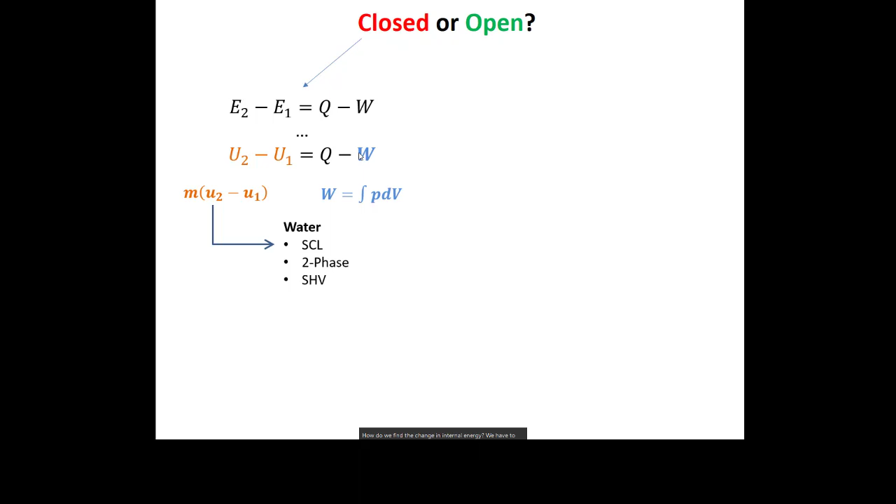Now, a lot of times, the hard part about thermodynamics is this choose your own adventure. So now when we get to how do we fix the state, how do we find the change in internal energy, we have to ask ourselves, well, what kind of fluid is it? Is it subcooled liquid, or is it water, or is it an ideal gas? And even if we know that, we're not done. Because if it's water, we have to know, is it going to be a subcooled liquid or a two-phase mixture or a superheated vapor? So what's the phase? And then if it's an ideal gas, I got to know what assumptions I'm going to make about the specific heat. So am I going to say that it's constant specific heat, where delta U will just be CV times delta T? Or am I going to say it's variable specific heat, and I'm going to try to find that specific internal energy on a table?

Now, eventually, as we progress through the course, we'll also have to figure out what to do on our flow chart here if it's an open system. But we don't have to do that yet. We're going to start thinking about that once we get, well, really to the end of this lecture.

The first half of today's lecture, probably more than half, is going to be going through examples with both water and ideal gases.

Here's the first problem we'll do together today. There's 2 kilograms of pure water in this piston cylinder assembly. The water is initially at 1 atmosphere and 20 degrees Celsius. Heat gets added at constant pressure until the piston hits the stop. So we're adding heat, which makes our fluid expand, which makes me think this water is probably boiling, because as some of it turns to vapor, that vapor takes up more volume, and that's going to happen until the piston hits the stops.

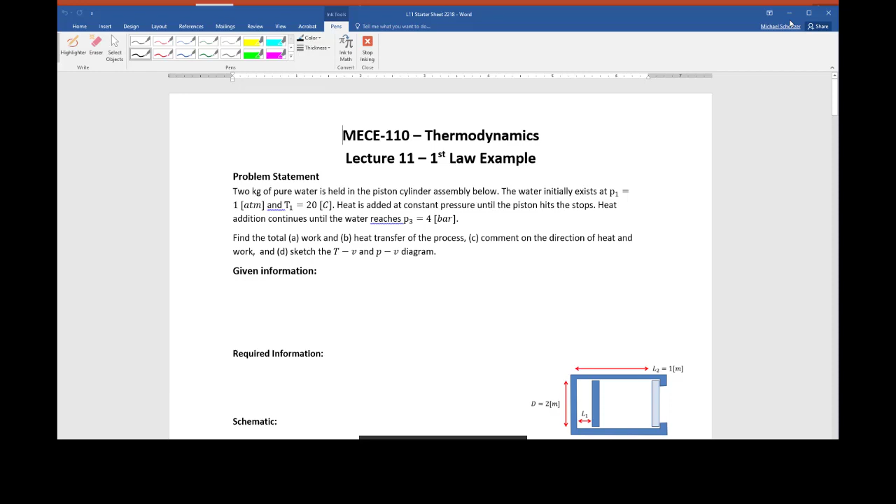I'm going to start working this out on this Word document. This is the same problem. One of the nice things, I don't know if we talked about this too much in class, but I like to draw what I call a state table as we get into problems like this that have more given information.

So in this problem I have 3 states. I have my initial state, state 1, where I'm at this position L1. Then we add heat until we get to our intermediate state, state 2, where we're at the stops, but still at 1 atmosphere. Then we get to state 3, where we're at the same volume. The piston doesn't move, but the pressure changes.

Now at these different states there's some information I want to know, like the pressure, and I like to put units here. This is one of the tips I'll give you: if it's a metric problem like this one, I always try to put my pressures in kilopascals, because it makes my life easier when we talk about work, kilopascals multiplied by change in volume in meters cubed gives kilojoules, which is usually what I want.

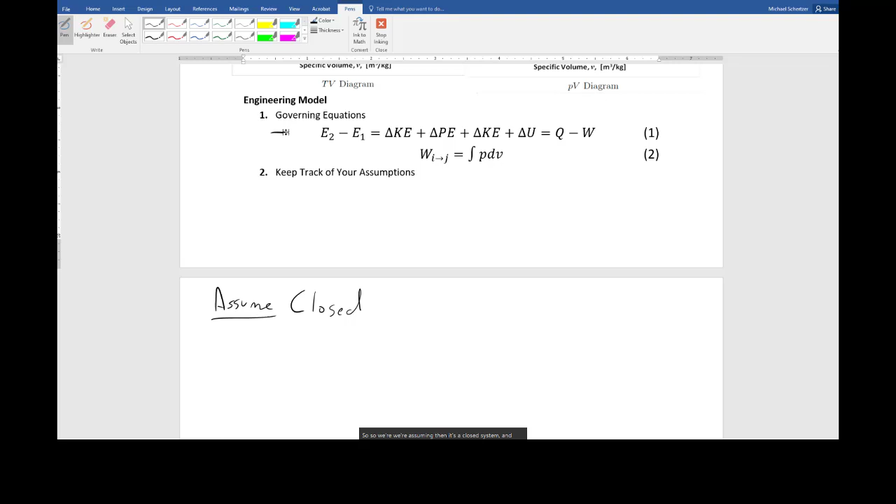So here, our first governing equation is the first law. We're assuming that it's a closed system. And because it's closed, this is my first law. But I'm going to neglect kinetic energy and potential energy, and this should say spring energy as well. All of these I'm going to say are about equal to zero.

And if it's closed, then the mass is constant. So my first law becomes mass times U at the end, minus U at the beginning, is equal to Q minus W.

Now there's two ways that I can think about this problem, and neither way is wrong because it didn't ask me for the specific parts. So I could either say that mass times u2 minus u1 is equal to Q 1 to 2 minus W 1 to 2.

Or I could say that mass times u3 minus u2 is equal to Q 2 to 3 minus W 2 to 3. Or I could sum these up, and if I added these together, I've got positive u2 and negative u2, so I'd get mass times u3 minus u1 is equal to Q1 to 2 plus Q2 to 3 minus W1 to 2 plus W2 to 3. And this right-hand side is equal to Q1 to 3 minus W1 to 3.

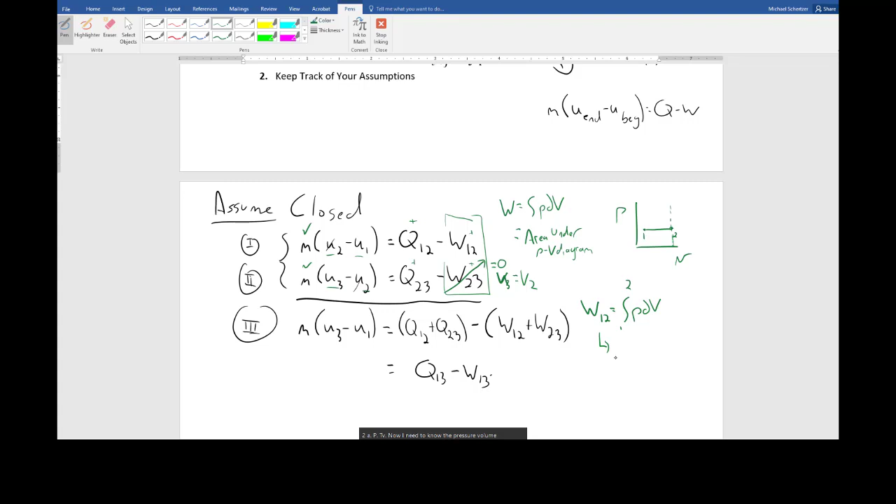Now I need to know the pressure-volume relationship, so oftentimes I'm going to look for something like PV to some constant equals a constant. In this case, they told us that pressure was constant, so N is equal to 0, and this just means that the pressure is equal to a constant, which means I can say that the work from 1 to 2 is equal to some constant, the pressure, which I know, times the integral from state 1 to state 2 of dV.

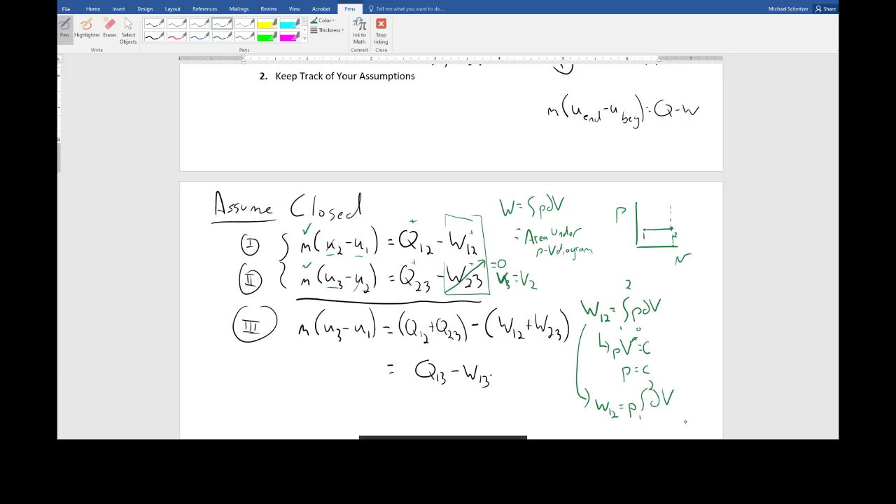And this is my second favorite integral, right? My favorite integral, although maybe this is my favorite integral because even if I wrote this integral for the vertical line, it gets confusing, right? So this is probably my favorite one, right? That pressure times V2 minus V1

is equal to the work from 1 to 2. So my equation 1 here becomes the mass times U2 minus U1 is equal to Q from 1 to 2 minus W from 1 to 2. But that's going to be equal to Q from 1 to 2 minus pressure times V2 minus V1.

My other equation, equation 2, is going to become M times U3 minus U2 is equal to Q2 to 3. That's it, because there is no work, right? Or I guess to be more explicit, I could say minus 0.

So now we got a choice. We can move ahead with this problem trying to figure out V2 and V1 because neither of those is given to us. Or we can try to find these U's. Right? It doesn't really matter. In an exam problem, maybe it says like, oh, find the work, so you do the work first or whatever. But if you were just doing this at your job or something, it doesn't really matter which one you do first. So I'm going to figure out this part first.

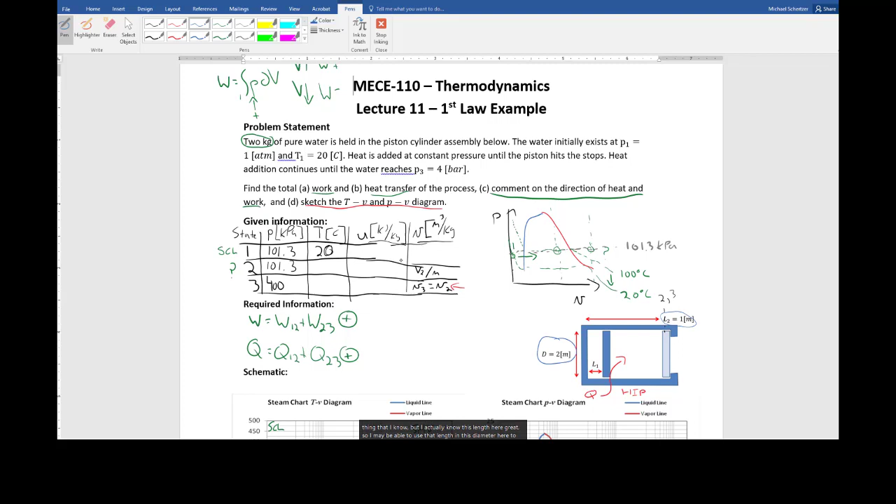But how do I get this one? I can go back up to my state table, and I can see that at state 2, I know the pressure. It sort of looks like that's the only thing I know, but I actually know this length here. So I might be able to use that length and this diameter to tell me something about the volume here. So if I wanted to find the volume at state 2...

The volume at state 2 is going to be the cross-sectional area of my piston, which is pi d squared over 4, or pi r squared, times L2. My diameter is 2 meters, so my radius is 1 meter, and my length is also 1 meter. So this is going to be pi times 1 meter squared times 1 meter, which is approximately 3.14 meters cubed.

But what I really want when I'm trying to fix a state is the specific volume, which is going to be V2 over the mass. I think we said there's 2 kilograms of water in this problem—I should have made it 1, obviously, so I could do the math in my head. So this is 3.14 divided by 2, which is 1.57 meters cubed per kilogram.

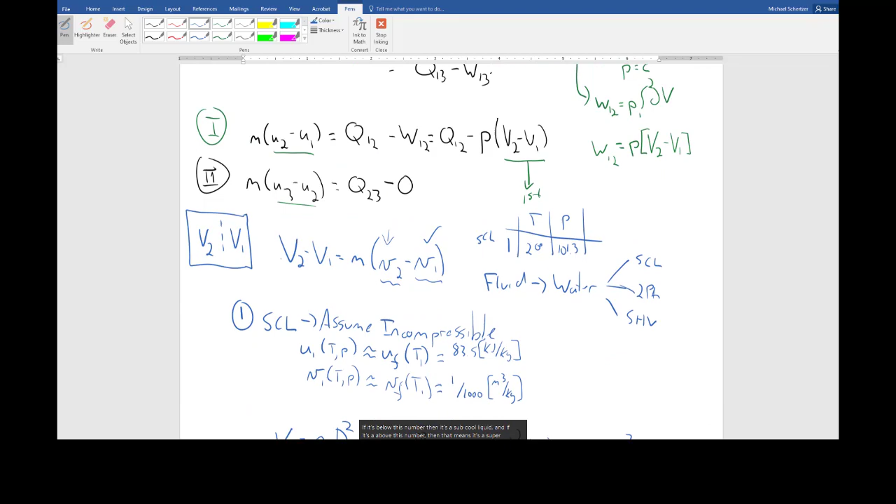Maybe that makes more sense if we look at it up here on our diagram. We're at this 1 atmosphere constant pressure line. If I drew a vertical line down from here, this would be VF, and a vertical line down here would be VG. So if my specific volume is in between these two numbers, then it's two-phase, because I'd be under the vapor dome. But if it's bigger than VG on this line, that would be like this point, and we'd be a superheated vapor. But if it was less than VF, that would be like state 1, and I'd be a subcooled liquid.

So now we have to see. We already looked this one up—this is 1 over 1,000, so that means it's not going to be a subcooled liquid. But if I go back down to that table and look here, VG is 57.79, so that's a pretty big number. But we're at 1.57. So that means we're two-phase. Does that make sense?

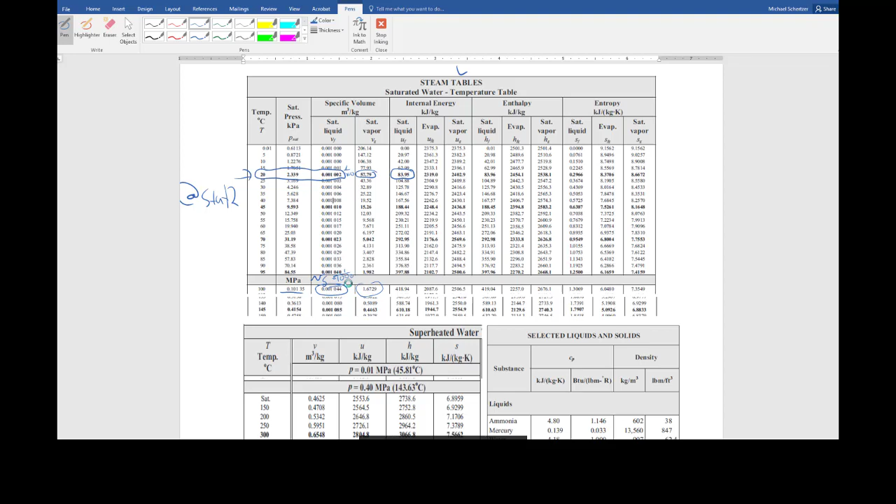So let's redo that math. I'm sorry about that. I looked at the wrong row of the table because I was thinking about the wrong state. So this was, we still conceptually got the right answer, but this number shouldn't have been 57, it should have been 1.67. We're still at 1.57, in between these two numbers, so we still got the phase correct. But our quality is going to be significantly different, because instead of 57 on the denominator, this should be 1.67. So this becomes 1.57 minus 1 divided by 1000, divided by 1.67 minus 1 divided by 1000. And we get 94%, I get 938.

So we do know the quality, but now we want to find UF and UG. And it's important to remember, which is the thing that I just messed up, that here we want to evaluate these properties at state 2. And the thing we know about state 2 is that the pressure is 1 atmosphere, which is equal to 101.3 kilopascals.

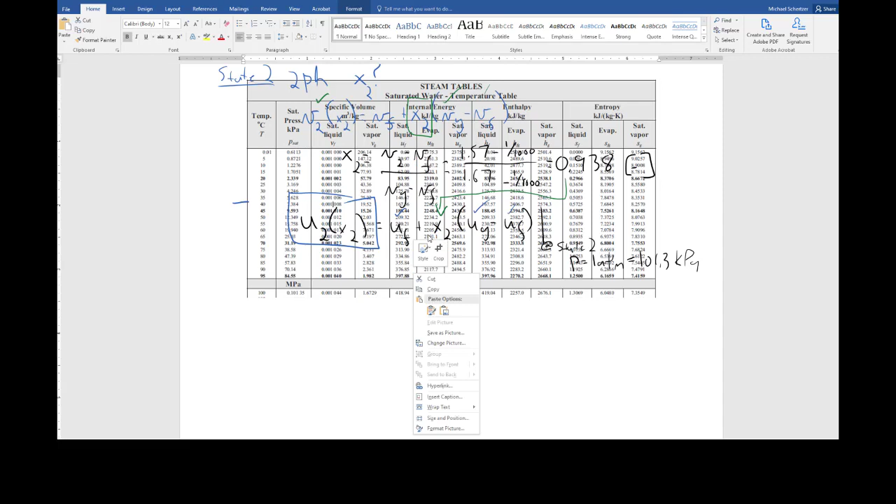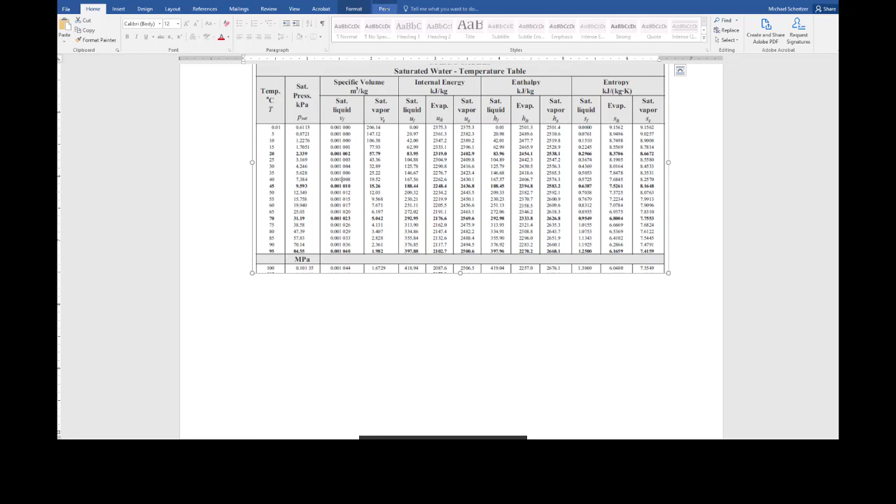So now I'm going to go pull UF and UG off that table. Or can I just do this? So the values that I want are UF, which is 418.94. In UG, I got to be a little careful, this isn't in the textbook, it doesn't have this middle column, but I want UG and not UFG. This is 2506.5. And this X2, what did we say, was 94, 0.938.

So when I put all that into my calculator, I'll do the bracket part first. So I'll keep this 418.94, this is kilojoules per kilogram, plus 2506.5 minus 418.94, times 0.938. 1958.13 kilojoules per kilogram. 2377.1.

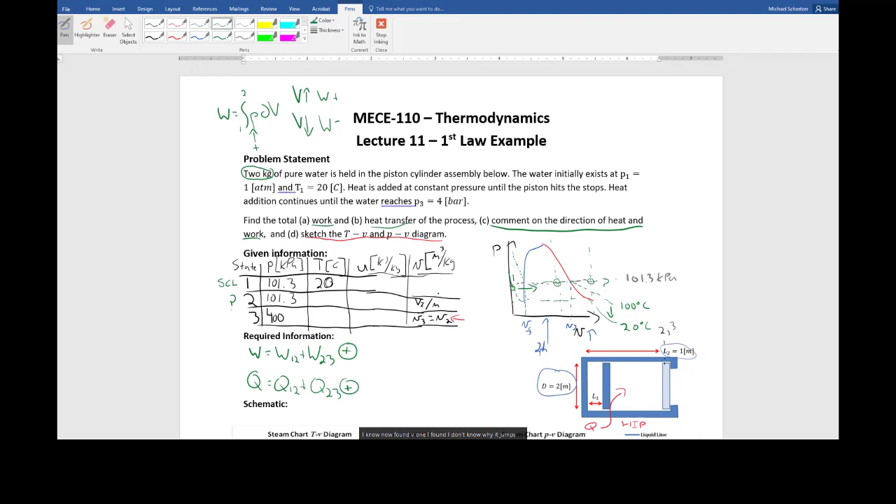So now I know, if I look at my state table... I found V1, oops, I don't know why it jumps like that, I must drag my hand wrong. Where did my state table go? Here we go. I found V1 and V2, and actually, because of that, I know V3 because they're the same. I found U1 and U2. So I'm doing a pretty good job with my states.

I can figure out the work because here, when I know this, the total work, right? I could either do this as... here. So I know that work, I'll do this down here. So I know that work total is equal to the work from 1 to 2 plus the work from 2 to 3. But because the volume didn't change from 2 to 3, I know that that's 0. And because the pressure was constant, we found that this was equal to the pressure at either 1 or 2, it doesn't matter because they're the same. I'll say P1 times, I could write this as V2 minus V1, or I could write this as the mass times P1 is equal to V2 minus V1, little v2 minus little v1.

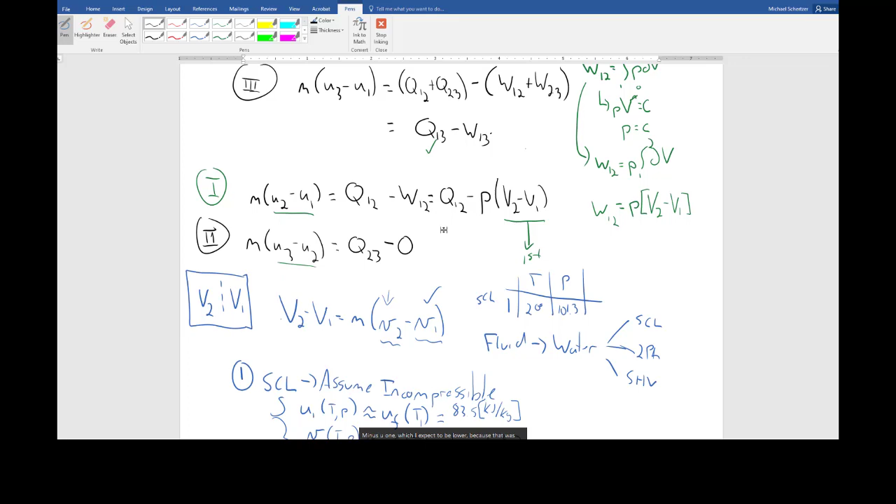It's going to equal my mass, which is 2 kilograms, times my little u at state 2, which was 2377.1, minus U1, which I expect to be lower because that was for a subcooled liquid. I think we have that up here somewhere — U1 was 83.5 kilojoules per kilogram.

Plus my work 1 to 2, which is the same as work total, so that's 317.9 kilojoules. Here I'll keep these two terms separate: 2377.1 minus 83.5, that's in kilojoules per kilogram. I can cancel my units here, times 2, and this is going to be 4587.2 kilojoules per kilogram, plus 317.9 kilojoules.

You can see that even though I canceled these units out, I messed it up over here — this should just be kilojoules, because I took kilojoules per kilogram and multiplied by kilograms. That's good, because — oh, I don't remember what this number was — oh, that's 4587. It's good because I can't add apples to oranges; these have to have the same units to add them together. So this is good, I can do that: plus 317.9.

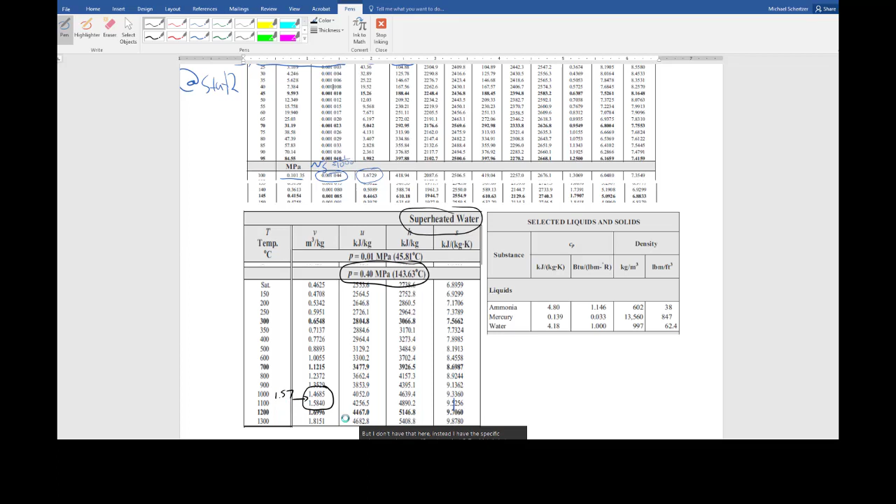My specific volume is 1.57, which is in between these two numbers. So for state 3, my interpolation factor A is going to be my specific volume at 3 minus V min, divided by V max minus V min. So this is 1.57 minus the lower number, 1.47, divided by 1.584 minus 1.47. I expect this to be a pretty high number because I'm a lot closer to 1.58 than I am to 1.47. So 1.57 minus 1.47 divided by 1.584 minus 1.47, and the answer I got was 0.88.

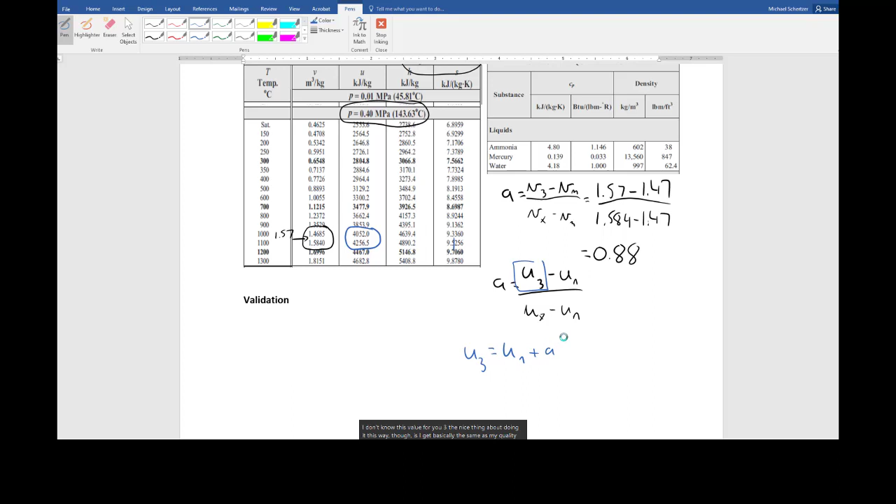But A is also going to be equal to U3 minus U min divided by U max minus U min. So now I've got to look for these specific internal energy numbers. I don't know this value for U3. The nice thing about doing it this way, though, is I get basically the same as my quality equation, that U3 is going to be equal to U min plus my interpolation factor A times U max minus U min.

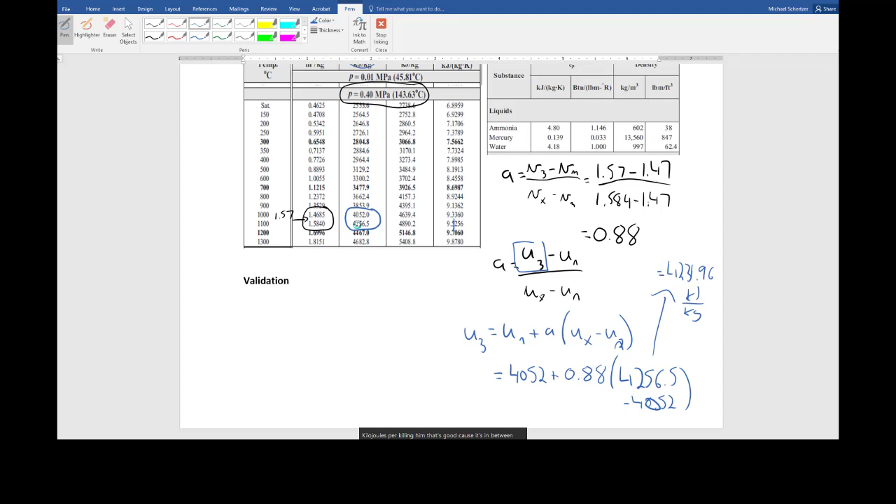Or that it's going to be equal to 4052 - these are all in kilojoules per kilogram - plus 0.88 times 4256.5 minus 4052. And my answer is going to be 4256.5 minus 4052 times 0.88 plus 4052. I get 4231.96 kilojoules per kilogram. That's good because it's in between these two numbers, and it's closer to the higher number, which I think it should be.

So now I can put this finally into this equation over here. This is equal to my mass, which is 2 kilograms, multiplied by U3, which was 4231.96, minus U2, 2377.1 kilojoules per kilogram, is equal to Q2-3 minus 2377.1 times 2. So here I get that Q2-3 is equal to 3709.72. My kilograms cancel, so this is just kilojoules.

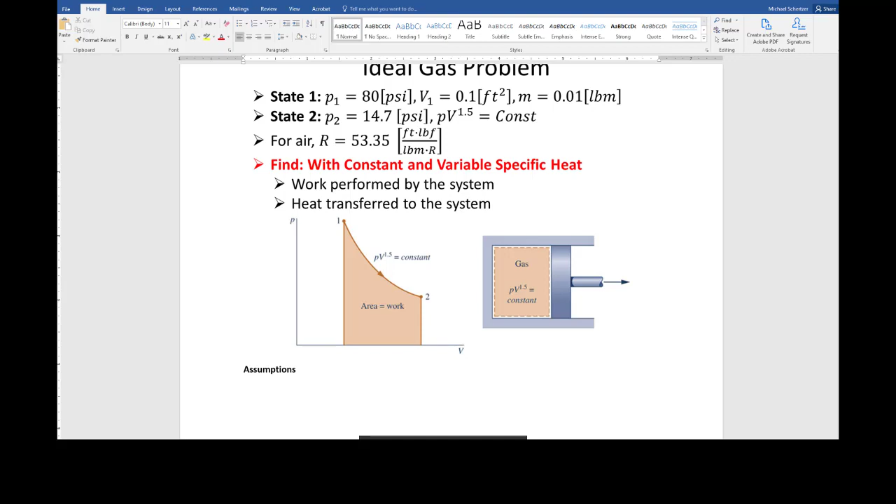We're going to just jump right into the next problem. So this is another first law problem. It's another closed system problem. But here, the difference is going to be when we ask ourselves, what's the fluid? It's going to be an ideal gas instead of water. So it's a little different, right? So we know some information about state 1. We've got pressure, volume, and mass. We know the pressure at state 2, and we know this pressure-volume relationship.

We're also given the specific gas constant for air. We would like to know, as we move between these 2 states, what's the work and what's the heat transfer in the system, right? It says heat transfer to the system, work performed by the system. So one of these things, at least right now, we can tell what the sign's going to be. So in this case, our area is expanding, as we go from state 1 to state 2, the volume is getting bigger. What that means is that the work we expect to be positive. So here I'm expecting work to be positive.

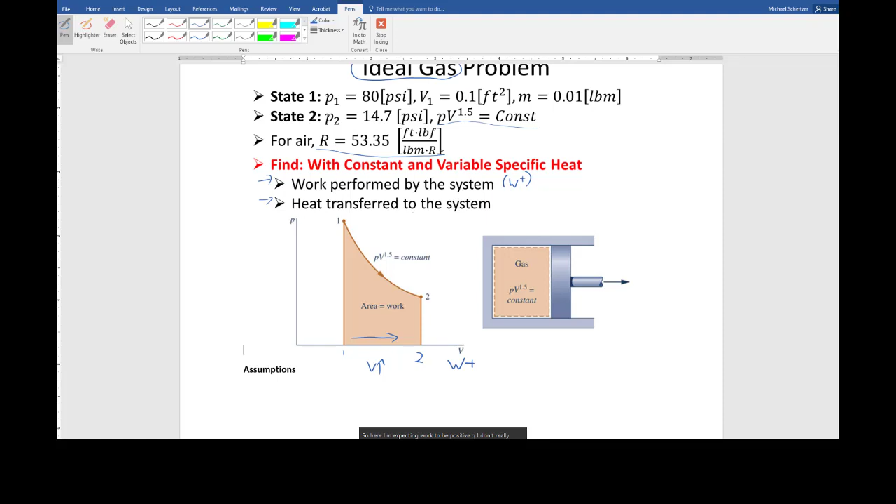Q, I don't really know. But that's why I have the first law. So I'm going to say that my first assumption, assumption 1, is going to be that this is a closed system. And because it's a closed system, that means E2 - well, I'm just going to write the whole thing.

So that means we're going to say that the change in kinetic energy plus the change in potential energy plus the change in any spring energy in the problem plus U2 minus U1 is equal to Q minus W. I'm going to assume that the kinetic, potential, and spring energies are all negligible. That doesn't necessarily mean that they're zero. What it means is that the changes in these things we're assuming are much smaller than the change in the internal energy, so I can neglect these things. They might as well be zero. It's like a speck of sand to a beach. And then this means that the mass times little u2 minus little u1 is going to be equal to Q minus W.

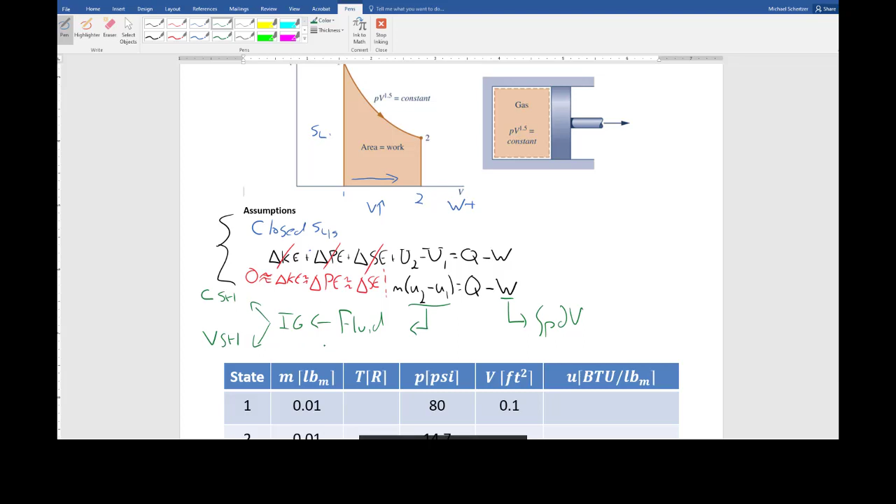I'm going to do this part second. I'm going to try to do it both ways, so you can see how to do it both ways. But first, here, this is my equation 1. First, I want to find the work. So I know that work from 1 to 2 is equal to the integral from state 1 to state 2 of P dV.

But I was told that pressure times volume to the 1.5 is constant. Yes, PV to the 1.5 was constant. That means that P as a function of V is equal to constant over V to the 1.5, or as I prefer to write this, C times V to the negative 1.5.

This is pretty similar to an example we did in class, but that was last week, and I know we're sort of drinking from the fire hose. So instead of just going right to the answer, you might already have some idea what the shape of this answer is going to look like, but it's okay if you don't, because the process of getting the answer is always going to be the same. So if you don't remember, you can just do the math.

So this is going to be the integral from 1 to 2 of this constant times volume to the negative 1.5 dV. But I can take the constant out: integral from 1 to 2, V to the negative 1.5, dV. This is a case where you actually have to do some calculus, which for me, again, is always a little nervous.

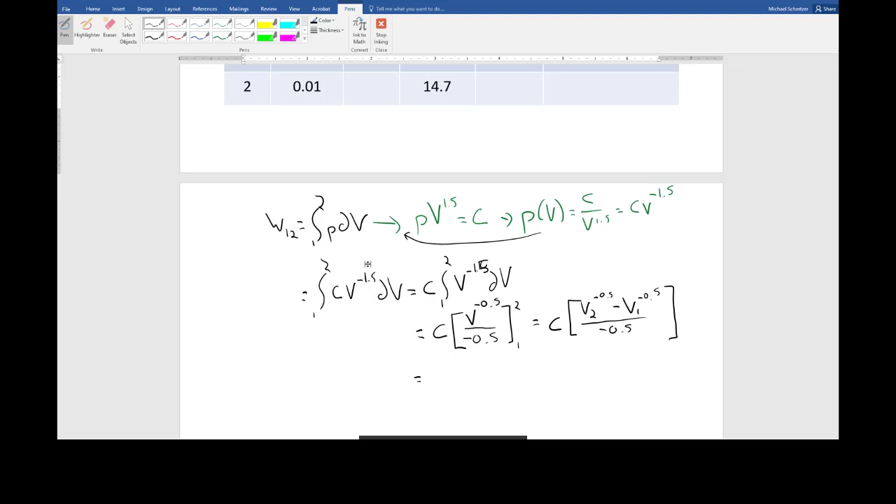I prefer not to have the negative sign in the denominator because I'm weird. So I'm going to multiply the numerator and the denominator by negative 1. Negative 1 over negative 1 is 1, so I'm allowed to do that. This is going to be C times V1 to the negative 0.5 minus V2 to the negative 0.5, divided by 0.5.

But now I remember that this constant is true at state 1 and state 2. If P V to the 1.5 is true everywhere on this line, that means it's true at state 1 and it's true at state 2. So this constant could be P1 V1 to the 1.5, but it could also be P2 V2 to the 1.5. So when I multiply this by state 1, I'll call it P1 V1 to the 1.5, and when I multiply it by state 2, I'll call it P2 V2 to the 1.5.

And I won't skip the step. So this is going to be P1 V1 to the 1.5 times V1 to the negative 0.5, minus P2 V2 to the 1.5 times V2 to the negative 0.5. I did switch V2 and V1 around when I went from here to here because I multiplied by negative, but I could have left it as V2 minus V1 if I left the denominator as negative 0.5.

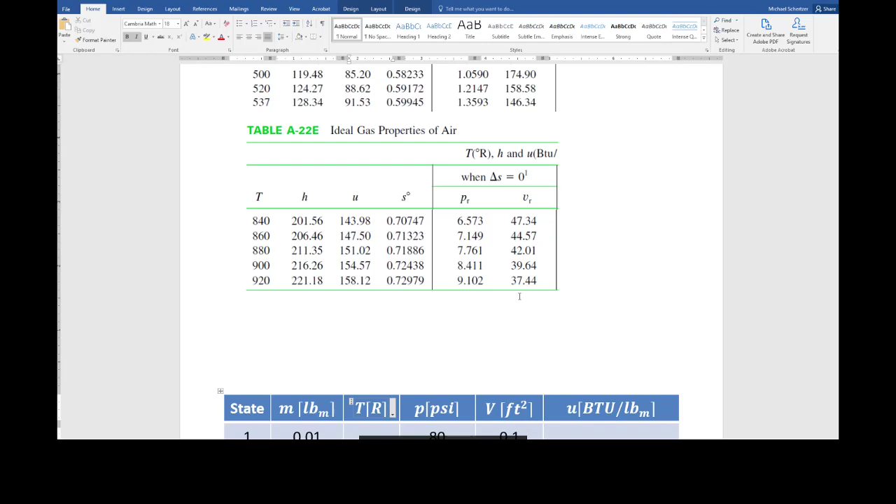Let me... I don't know, did it paste it somewhere and I just didn't see it? Here we go.

Well, anyway, I know that my P1 is 80 psi and my V1 is 0.1 feet squared, right? And the beauty of this method so far is that this is an imperial problem, which I tend not to like as much. And now for some reason my pen doesn't work.

Oh, here we go. But the symbolic part, it doesn't matter until we start putting numbers in, right? So here I know that P1, well, if I write out my state table, right? So I have my states 1 and 2. P1, V1, T1, or P, V, and T. Right, so pressure is in PSI, volume is in cubic feet, and temperature should be in Rankine. We'll see what they gave it to us as.

So for state 1, 80 psi and 0.1, this should be cubic feet. State 2, they only told us the pressure, 14.7, which is atmospheric pressure.

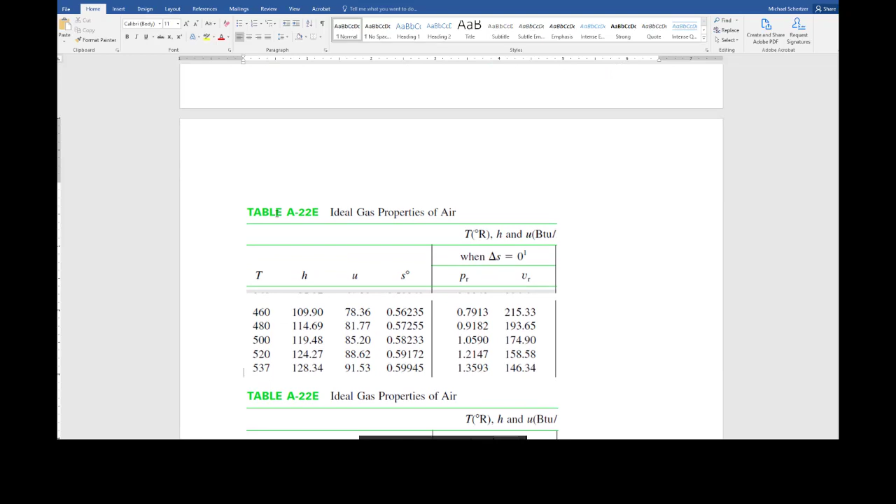So now comes the point where we got to deal with the left-hand side of our equation, because remember we were saying that mass times U2 minus U1 is equal to Q minus W. The good news is now we know the work. I think they told us the mass, but I don't know U2 or U1.

Instead of doing it both ways, since we're going to do two ideal gas problems, let me pick one here. So now I got to ask what's the fluid. Here it's an ideal gas, air. So it has to be variable specific heat or constant specific heat. We're going to do two different problems in two different ways. On an exam, I will tell you which method I want you to use.

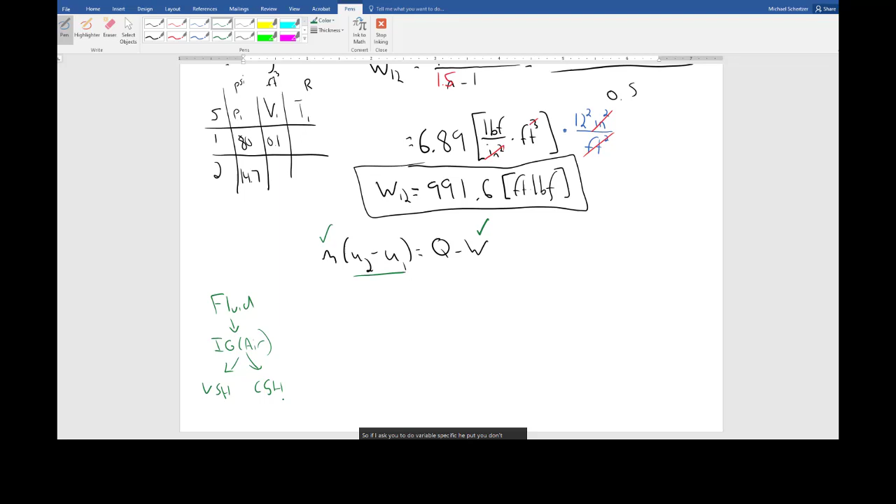It's always best to pick the method I ask you to use, but the next best thing is to use the other method. The worst thing to do is leave it blank. So if I ask you to do variable specific heat, but you don't remember how, then do constant specific heat, because that's a lot better than doing nothing. Here we're going to do constant specific heat.

Under the assumption of constant specific heat, we're never going to find the individual specific internal energies. Instead, we're going to take mass times CV. Actually, you know what, since they don't tell us what CV is, I'm going to change my mind. I'm going to do this one as variable specific heat and the other one as constant specific heat.

So here we're going to do variable specific heat, not constant. This is the more accurate answer. The downside is we got to use the tables. So here we need to find U2, which is a function of T2, using table A22E, and we also have to find U1, which is a function of T1, on table A22E.

The downside of this is that I don't know T1 or T2. When you get into a situation with ideal gases and you can't find one of pressure, volume, or temperature, or mass, that's a good bet you're going to have to use the ideal gas law. So here we'll use the ideal gas law, which is pressure times volume equals mass times R times T.

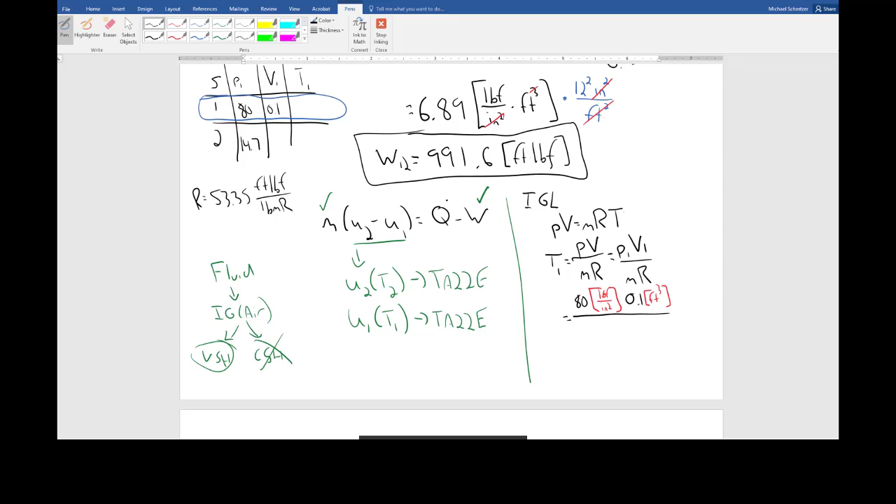Is it 0.01? I can't remember. 0.01 pounds mass, times R, which we transpose down here as 53.35 foot-pounds force per pound mass. Now the good news here is that the pounds mass cancel, but we don't have foot-pounds on the top, right? We've got cubic feet times pound force over inches squared.

So again, we're going to have to get rid of that inches squared, as 12 squared inches squared per foot squared. The inches squared are going to cancel, that's going to cancel, and now we have foot-pounds. Foot-pounds canceled with foot-pounds, and we're going to get, oops, there should be a pounds mass degrees Rankine over here. And then our denominator is going to be 1 over Rankine, which is Rankine.

So here, if I put all of this into my calculator, I'm going to get 80 times 0.1 divided by 0.01, that's 800, divided by 53.35, so that's 14.995, 1 over 1. Oh no, because I forgot to multiply by the conversion.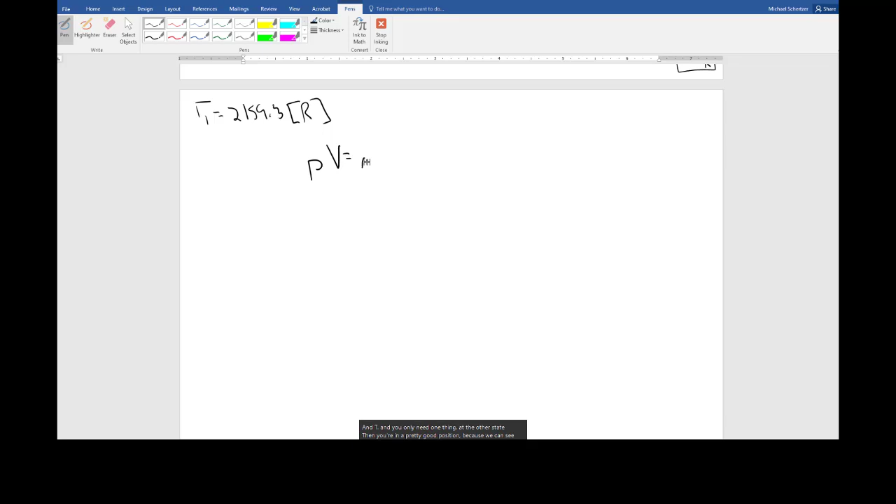We know that PV is equal to... I don't know why it does that, sorry, I'm lost on the page here. PV is equal to M R T.

But because this is a closed system with no chemical reactions, the mass stays constant because it's closed, and this specific gas constant stays the same as long as it's the same gas. So if there's no chemical reactions, it's the same gas, and what that means is that PV over T is equal to MR, and that's true at state 1. It's also true at state 2.

So I don't care about M and R anymore because they're constant. Right now, what I'd like to find from this equation is T2. So when we look at this, I know P1, V1, T1, P2, and V2, but I don't know T2.

So if I'm trying to find T2, that's going to be equal to T1, and then I'm going to get a couple of different ratios, right? So T1 times P2 over P1 times V2 over V1. And there's some beauty in this because these pressures are both in PSI, but it's a ratio of pressures in PSI.

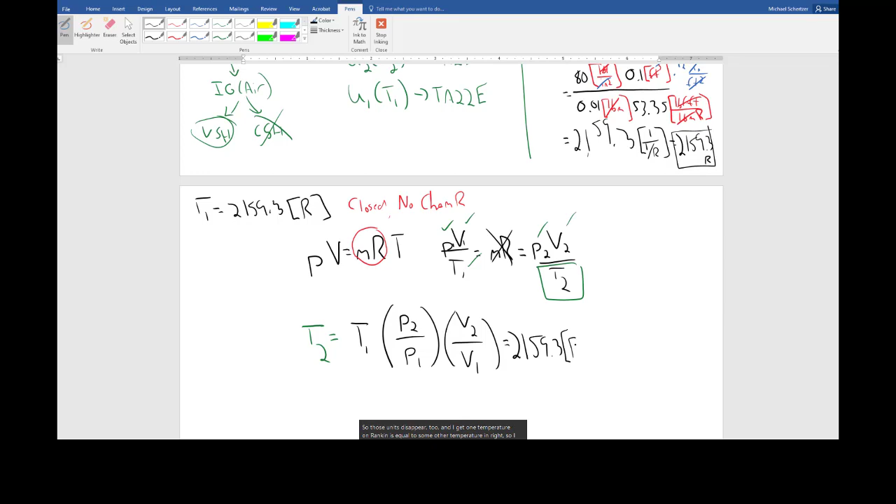So this pressure over pressure has no units, and these volumes are in cubic feet, but it's cubic feet over cubic feet, so those units disappear too, and I get one temperature in Rankine equal to some other temperature in Rankine. So I can take T1, which I know is 2159.3 Rankine, times V2 when I calculated it up here was 0.31 feet, so 0.31... oh, I guess I do the pressures first. 0.31 over 0.1, those are cubic feet, but they go away.

And these pressures are in PSI. P2 is 14.7 and P1 is 80. So I'm going to get 2159.3 times this 14.7 divided by 80. This is 0.18, and this is about 3.1. So then this is times 0.18 times 2159.3.

This is going to be 1204.9 Rankine. This is T2, and T1 was equal to 2159.3. And this is great because I know that these specific volumes or the specific internal energies are a function of the temperatures. But I'm not done yet, because I need to actually find those values on the table.

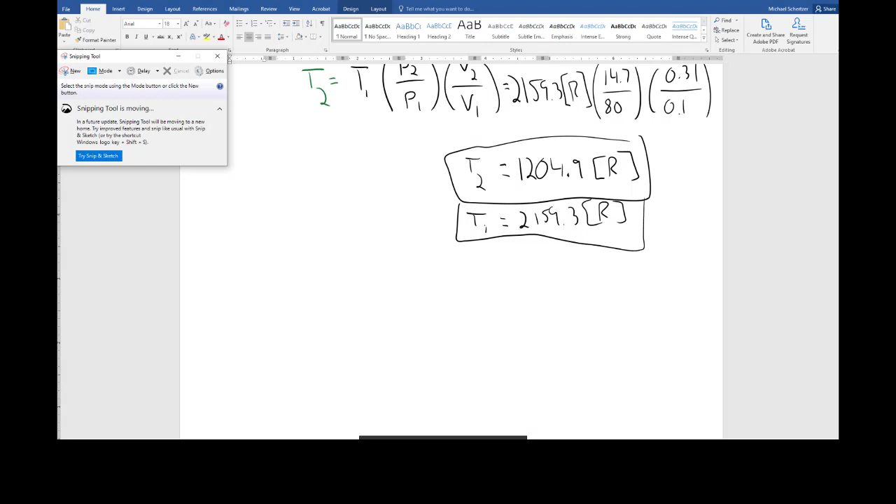Here, why don't I do this... and they're not on this table. Oh, that's unfortunate. But if they were on the table, then what I would do is I would find the values in between. So here I would go to, let's pull up.

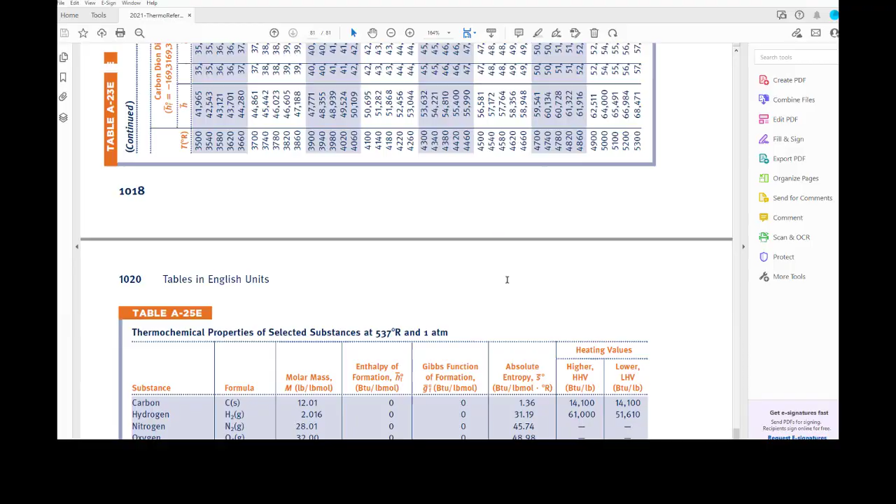What would we say, 2159 or something? And what are the values? 2159 and 1204. 2150, oh, it's in between that. Okay, so I'm going to snip this.

So some of this stuff, we don't know what it is yet on this table, but we know this is temperature in Rankine. This is... no, this is H in kilojoules per kilogram, and this is U in kilojoules per kilogram. The rest of this stuff, we don't know what it is yet.

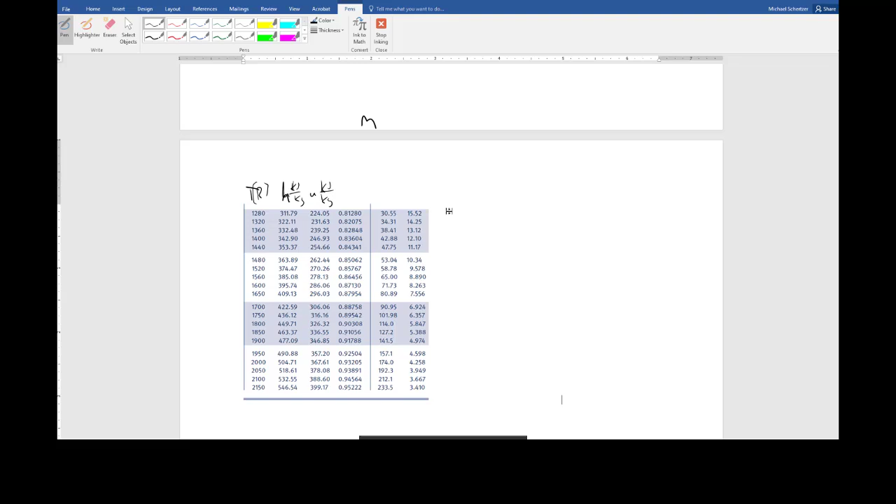So my two temperatures are 1204.9, which is 1205, and 2159. 1205 and 2159. So I didn't go, sorry. So 2159 is just above here. Let me go back and get a better snip here.

So here, 1205 is in between 1,200 and 1,240, so I need to find my interpolation factor. A is going to be 1205 minus 1,200, divided by 1,240 minus 1,200. 1205 minus 1,200 divided by 40. That's 0.125.

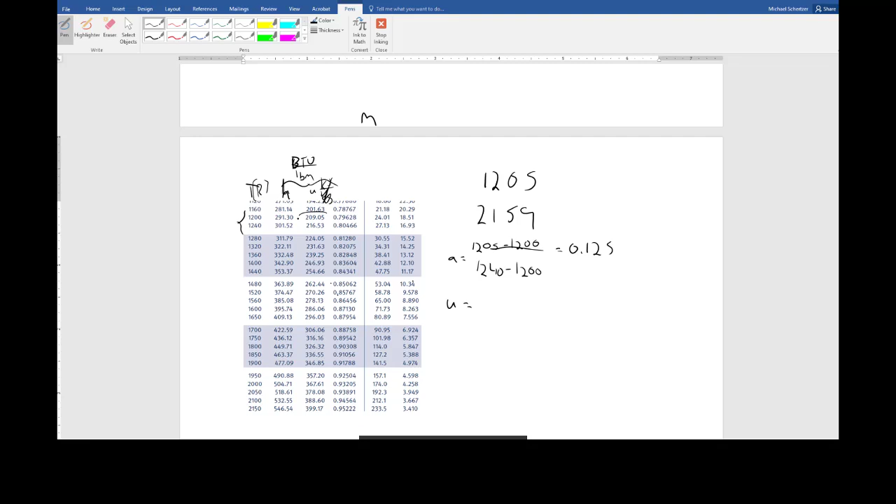209.05, no, it's going to be the value that I want. U1 minus U-min, which is 209.05, divided by the maximum value, 216.53 minus 209.05. But I want to rearrange this, because I don't know U1 and I do know A. So U1 is equal to U-min, which is 209.05, plus 0.125 times 216.53 minus 209.05.

And I'm going to get 210.0, correctly BTU per pound mass. So that gives me U1, which is good because now when I go back to my first law, I know U1. The only thing here I don't know is U2.

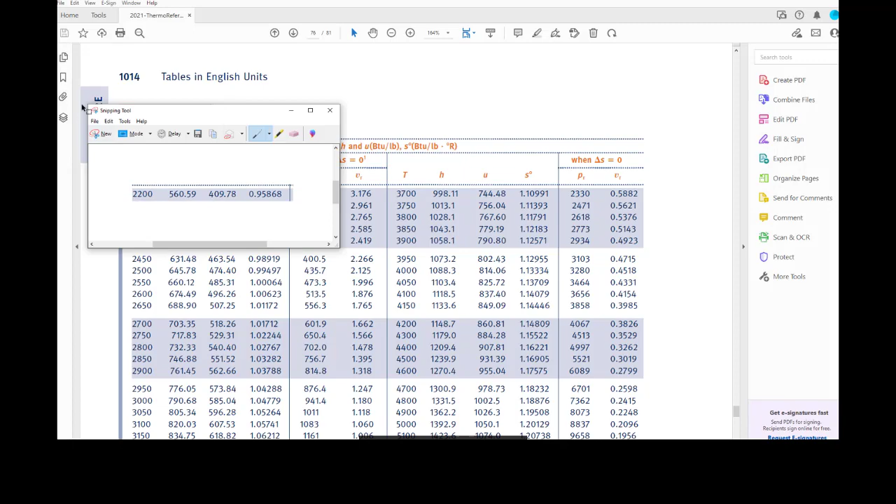Unfortunately, that means I've got to interpolate onto the next row of the table. So if I come down over here and snip just this guy... sometimes I'm just going to leave it like this, maybe. We'll see. Yep. So now this is my U value here, and this is my other U value.

So here in this 50 degree range, it goes up about 10. So we have my interpolation factor B similarly: we know the temperature, our other temperature is 1205... no, this one is the 2159 minus 2150, divided by the full range, 2200 minus 2150. And this is going to be 9 divided by 50.

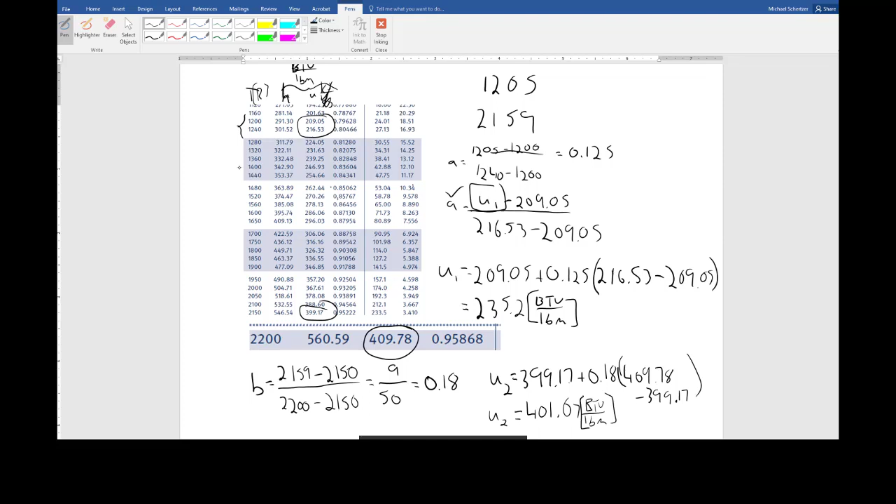So now I have U1 and U2. So my equation, which was mass times U2 minus U1 equals Q minus W, or Q, which is now the thing I'm looking for, is equal to M times U2 minus U1 plus W. I know all of these things. The mass, I believe, was 0.01 pound mass, I think.

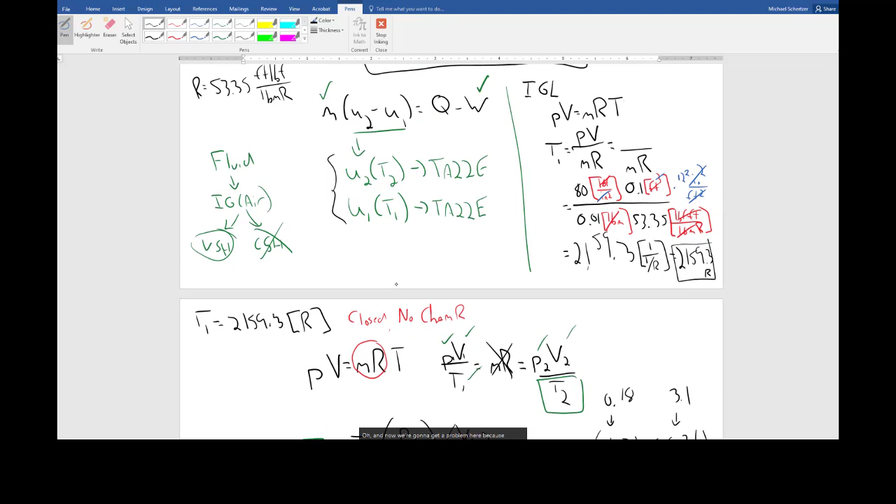.01 pound mass times U2, which is 401.07 minus 235.2. This is in BTU per pound mass, which is nice because those two things cancel. Oh, and now we're going to get a problem here, because when I calculated the work, I did it in foot-pounds. It's 991.6 foot-pounds.

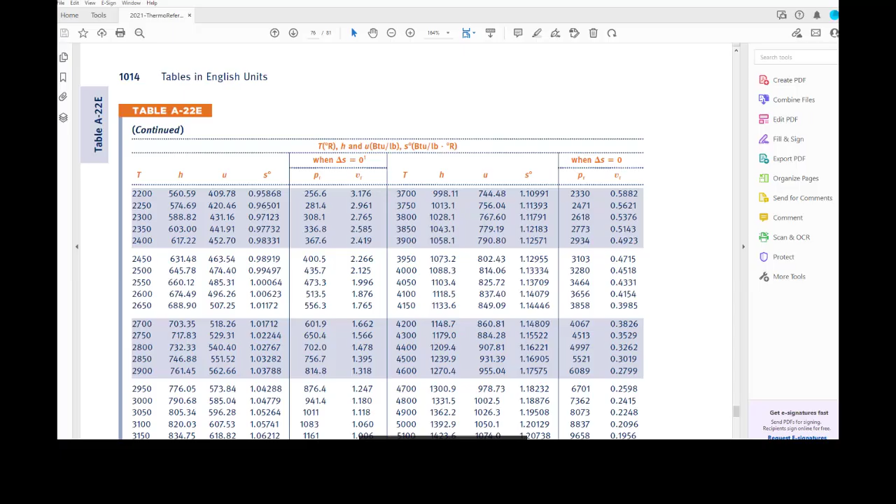Now this is a thing that you're probably going to eventually get burned into your head, even if you don't want to. But let's see if we can find it. Is it here? If not, it's on the equation sheet. Energy. So 1 BTU is equal to about 778 foot-pounds. That's in this reference table, on the website on the very first page, or the equation sheet I put together for the class. So here I know that 1 BTU is equal to 778 foot-pounds force.

So when we add these together, it might look like one's really small and one's really big, but we don't really know anything until we get everything into the same units. So 401.07 minus 235.2 times 0.01, this is 1.66 BTU, plus 991.6 foot-pounds force times 1 BTU per 778 foot-pounds force. So those cancel, and now this number that looked really big is actually not that big - or at least it's of the same magnitude as this number.

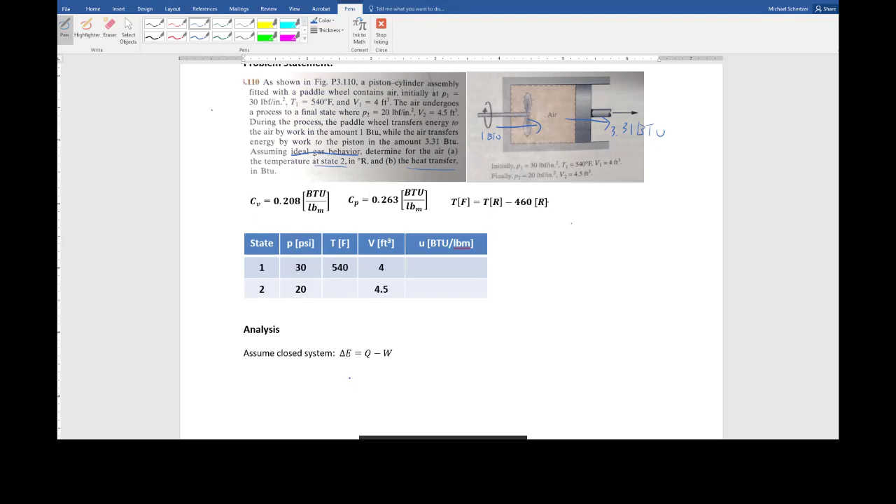So here we're going to assume - first it tells us it's an ideal gas, so we can assume that it's an ideal gas in a closed system. This means that we get delta E equals Q minus W, but here I'm going to assume that the change in kinetic energy is approximately equal to the change in potential energy, which is approximately equal to the change in spring energy, approximately equal to 0.

So my first law, unsurprisingly, becomes M times U2 minus U1 equals Q minus W. We're trying to solve for, I'm going to say W net here. We're trying to solve for Q. Q is equal to M times U2 minus U1 plus W net.

Usually what I would tell you, what we've been saying this whole time, is work is equal to the integral of P dV. But in this case we cannot use this relationship because we don't have a pressure-volume relationship. Instead, they just told us - so this is going to be the work from the paddle wheel plus the work from the system.

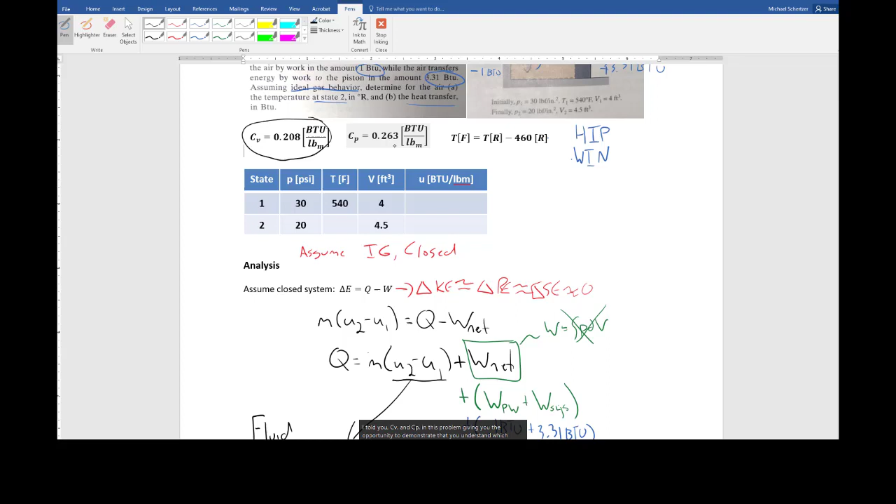The problem, I think, tells me CV - although I gave you the opportunity, I gave you CV and CP in this problem, to demonstrate that you understand which one you're supposed to use when you have delta U. So I know CV and I know T1, sort of - I know CV and I know T1.

Here they're kind of being sneaky because they told me the temperature, but in Fahrenheit. I don't care about Fahrenheit temperatures for ideal gas problems - I always want to turn these relative temperatures into absolute temperatures. So I want to turn this into Rankine. And here the problem told us that if we have a Fahrenheit temperature, we have to add 460 to get to a Rankine temperature.

So 540 plus 460 is 1,000 Rankine. So here they told me the Fahrenheit temperature, which seemed like a nice thing, but always turn ideal gas temperatures into absolute temperatures. Either Rankine if it's imperial like this, or into Kelvin if it's metric.

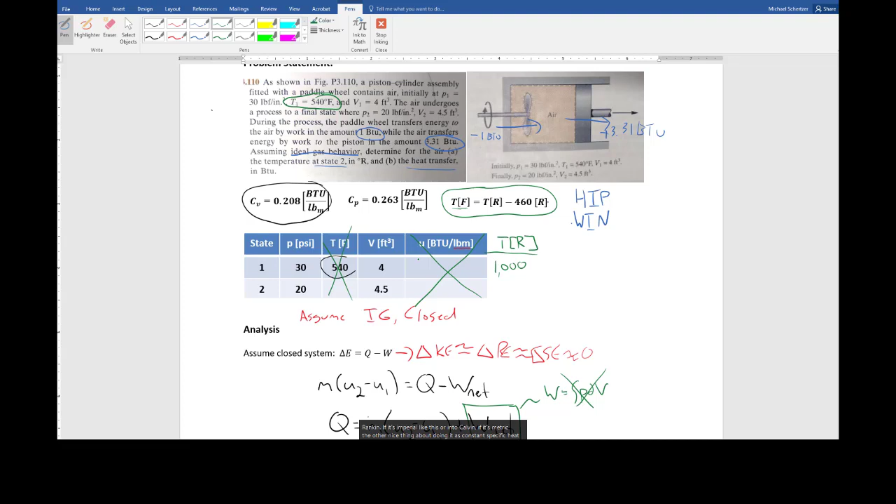The other nice thing about doing it as constant specific heat is I don't care what the value of U is, because I'm never going to find the individual values of U. Instead, I have an estimate for what delta U is.

So this would be good, and I would be finished this problem already if I knew T2. But I don't know T2. So I got to use something to find T2.

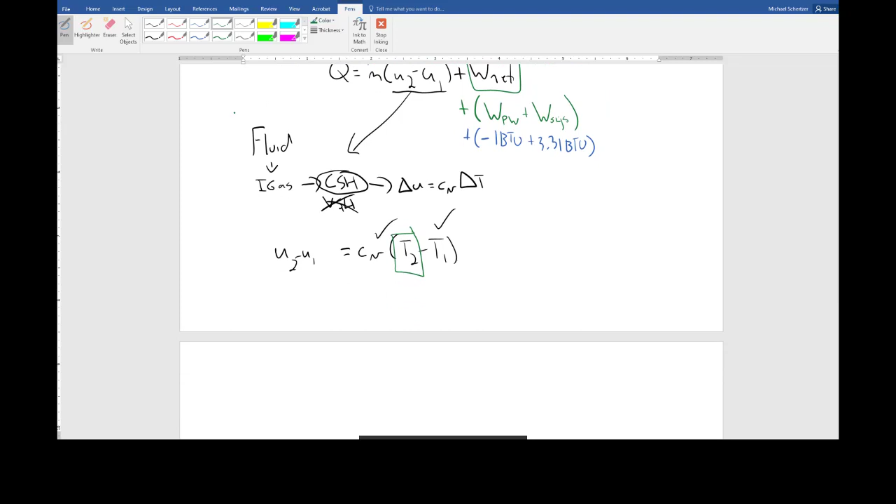And when I have an ideal gas law problem, and I'm sitting around thinking, man, I wish I could fix the state, but I don't know what the temperature is, or the volume is, or the mass is, I can remember to use the ideal gas law.

In one of two ways, I can say that PV is equal to MR times T, or I can remember that because it's a closed system with no chemical reactions, then the mass stays constant, and R is constant because the gas doesn't change. So I prefer to use the ideal gas law this way if I can. So PV over T is equal to MR, but since M and R don't change, that's constant. P1 V1 over T1 has got to be equal to P2 V2 over T2.

Right? The thing that I'm trying to find is T2. So here I'm going to say that T2 is equal to T1 times P2 over P1 times V2 over V1. And I'm going to hope I have the rest of that information.

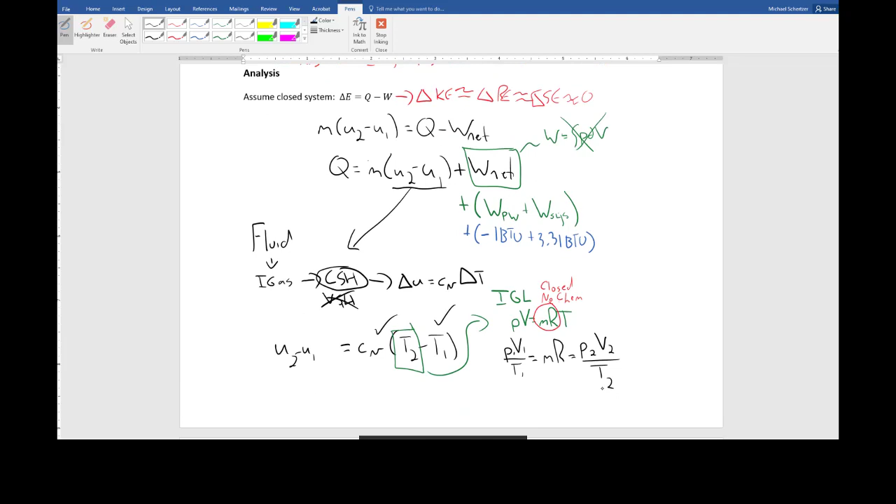So P2 over P1 is 2 over 3. So this is 1,000 Rankine times, this was 20 psi over 30 psi. But the psi's cancel, so as long as they're both in absolute pressures, that's fine. V2, oh, and they gave me V2 and V1, 4.5 divided by 4. These are both feet cubed, I'm sorry. They cancel. So here I'm going to have 2 divided by 3 times 4.5 divided by 4 times 1,000, and I get...

750 degrees Rankine. Now, if we were going to use variable specific heat, then I would take 1,000 degrees and 750 degrees, and I would go to table A22 and I'd look it up. But I don't have to do any of that stuff here because I just put it in here, right?

So now U2 minus U1 is equal to CV, which they told me, 0.208, this is in BTU per pound mass degree Rankine, times T2 minus T1, or I guess I can put the numbers in, which is 750 minus 1,000. That's going to be 750 minus 1,000 times 0.208. Negative 52 BTU per pound mass.

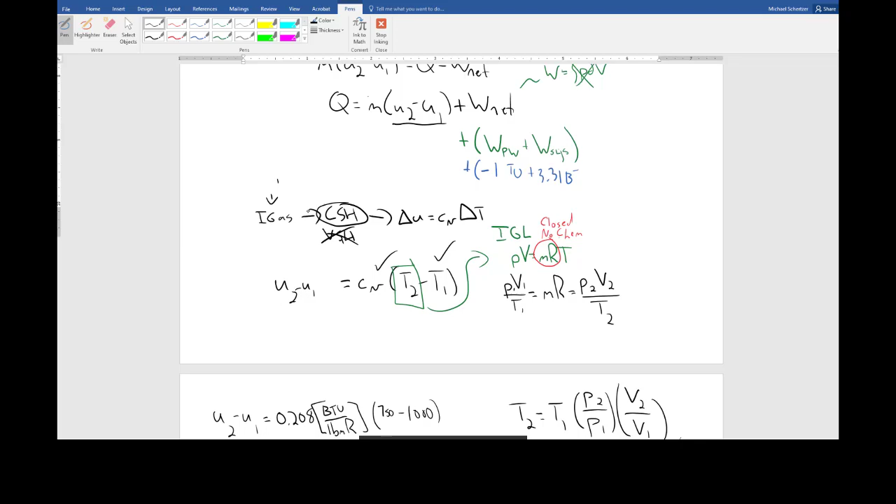But did they tell me the mass? I don't think they did, right?

So when I look here, right, so I can see that I need Q is what I'm trying to find. Mass times U2 minus U1. Or because we use constant specific heat, this became CV times T2 minus T1. And anytime you do that, you have to tell me you're using constant specific heat, that's your assumption. Plus the work. Good news is I know CV, I know T1, I know T2, I know the work. I don't know the mass.

This is my preference for using the ideal gas law. But here we ran into a snag because I need to find the mass. And usually if you have an ideal gas law problem and you need to find the mass, the way you do it is you know that PV is equal to MRT.

You go to the state that you know the most about, that's probably state 1. And I say that M is equal to, M is the same, so you could use state 1 or you could use state 2. But I'm going to say P1 V1 over R T1. Unfortunately, in this problem, they don't tell me R. So I'm going to show you how to find it or how to calculate it. So R is equal to R bar divided by the molar mass.

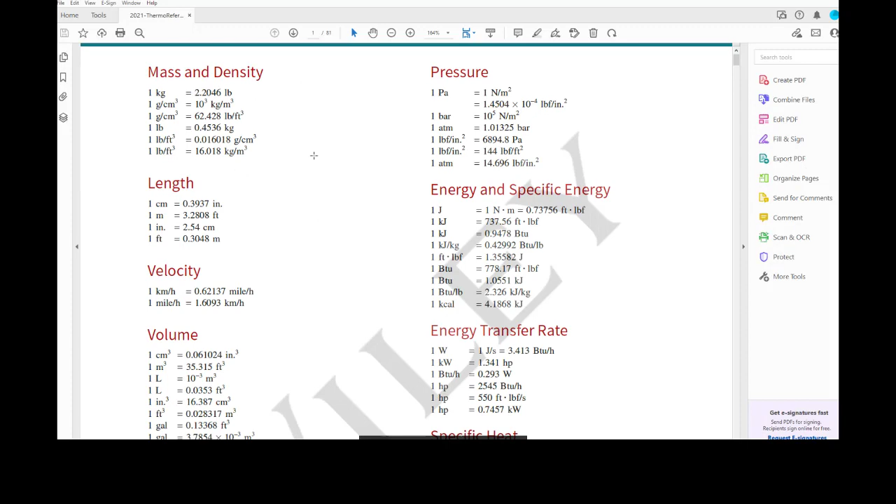R bar, the universal gas constant, is on the first page of our reference sheets in a couple of different units. If it's metric, I'm going to use 8.314 kilojoules per kilomole Kelvin. But here I want the BTU version: 1.986 BTU per pound mole degree Rankine.

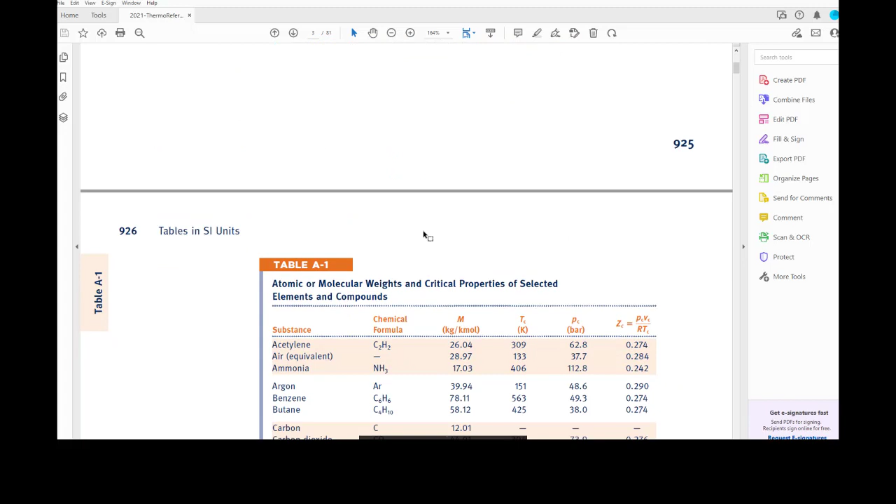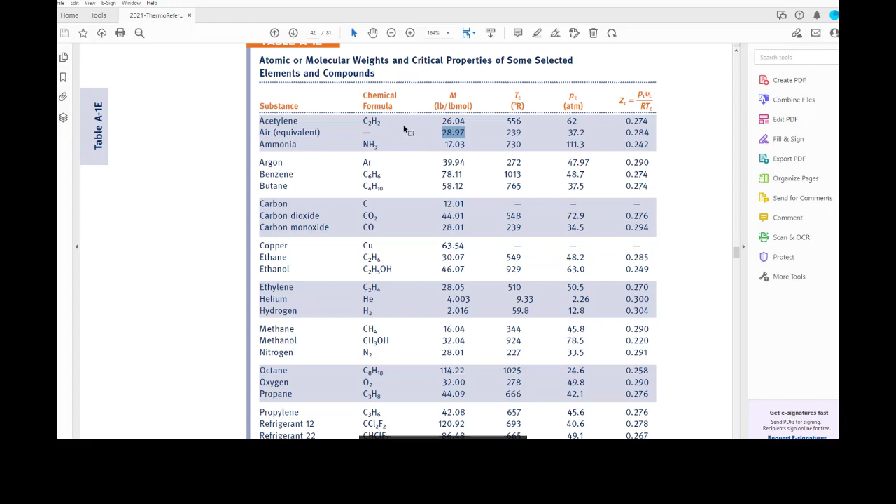Now I want to find the molar mass. Molar masses can be found on table A1 or A1E if you're in imperial or English units, since atomic or molecular weights are the same as molar masses. I'm looking for air on table A1E. Notice the coloring changes - metric tables have light orange highlighting, but imperial tables are grayish or blue. For air, it's 28.97 pounds mass per pound mole.

Since I have pounds mole in the denominator of the numerator and the denominator of the denominator, they cancel out, and I get 1.986 divided by 28.97, which gives 0.0685 BTU per pound mass Rankine.

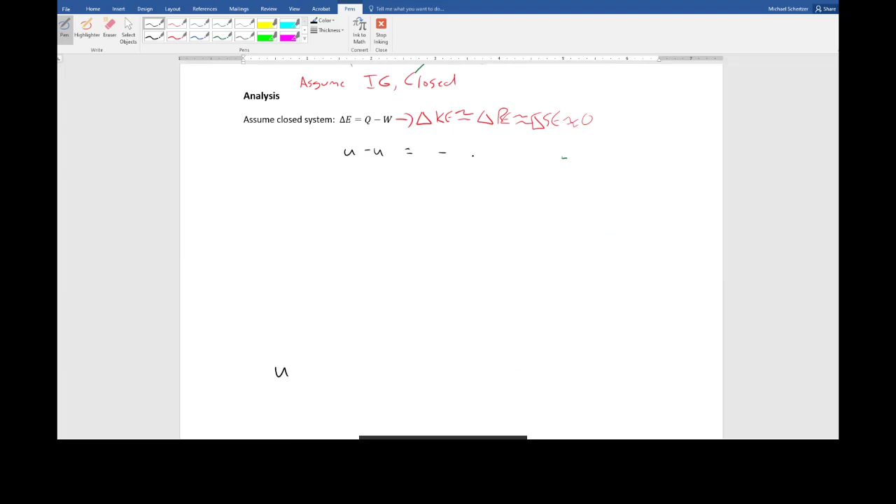Pressure 1 was 30 psi, pounds force per inch squared, times the volume, which was 4 cubic feet. This is a pretty common thing - you've got pressure in inches squared and volume in cubic feet. We have 0.069 BTU per pound mass Rankine, and our temperature T1 was 1,000 Rankine.

First I'm going to check the units, and I see this unit mismatch problem. So I need 12 squared inches squared per foot squared. Now I've got foot pounds here, which is another unit mismatch, so maybe I could have picked the other version of R. But I also want to take this foot pounds and convert using 1 BTU per 778 foot pounds force. Now my foot pounds cancel, and I got BTU on top. The BTU cancels with this, the Rankine cancels with this, and the units I get are 1 over 1 over pounds mass, which is pounds mass - what I want.

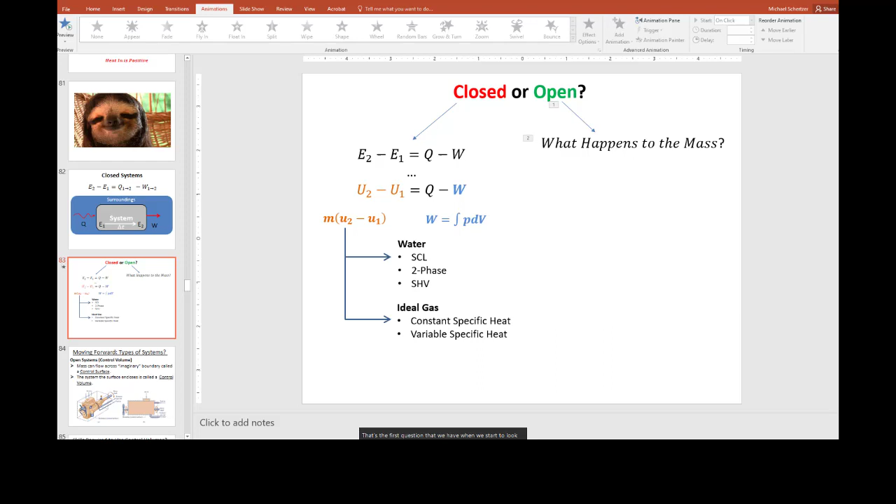Okay, thanks everybody. We're in the home stretch now. I appreciate you sticking with me. I know going through the examples is valuable, but especially when we do 3 hours or 2.5 hours of examples straight, it can probably take a significant amount of concentration to try to follow it.

But hopefully you get this general idea that when we have a closed system, which is what the long answer problems for the first midterm will be, we have delta E equals Q minus W. Then we'll make some assumptions, and we'll get to the change in internal energy equals heat transfer minus work. We'll find the work as the integral of P dV, unless they just give it to us.

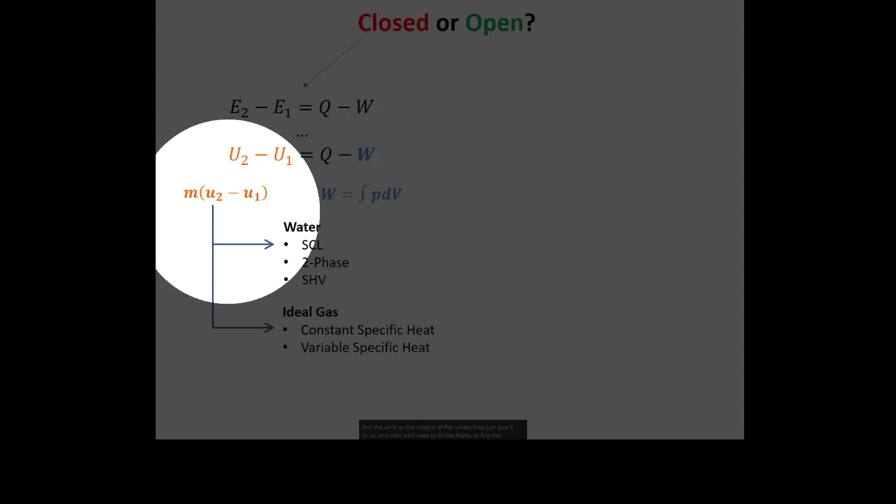And then we'll need to fix the states to find the change in specific internal energy. To do that, we need to know what the fluid is. If it's water, we'll want to know the phase: is it a subcooled liquid, a two-phase mixture, or a superheated vapor? And if it's an ideal gas, we want to know if we'll use constant specific heat or variable specific heat. That's generally what we do for a closed system.

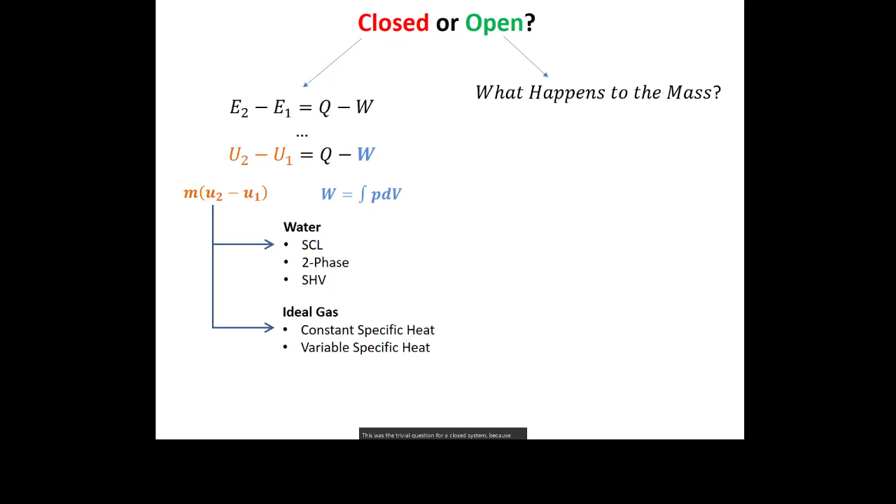But now we got to start increasing the complexity of the processes we're going to look at. So what happens when it's an open system? The first question we want to know is what happens to the mass. This was trivial for a closed system because the mass just stays in the system, nothing happens to it. But for open systems, mass is coming in and out through different ports in our system.

So if you think about something like an internal combustion engine, there's air coming in through the air intake, exhaust gas coming out, fuel coming in through the fuel injection. So there's mass that's always coming in and out of the system, and not only can you have heat transfer and work going on, but there's mass coming in and out.

And one of the things we've hopefully seen over the last week and a half is that mass carries energy with it based on its temperature and its pressure. So in order to do an energy balance, to figure out how energy is conserved in a system like this, where mass is moving in and out, we need to know what's happening with the mass, because the mass is carrying energy with it.

So generally for open systems, there are at least 3 questions we want to answer. The first is, where do we draw our control volume? That's like, where's the boundary between our system and the surroundings, or what part of the universe are we most interested in? The second question is, what happens to the mass?

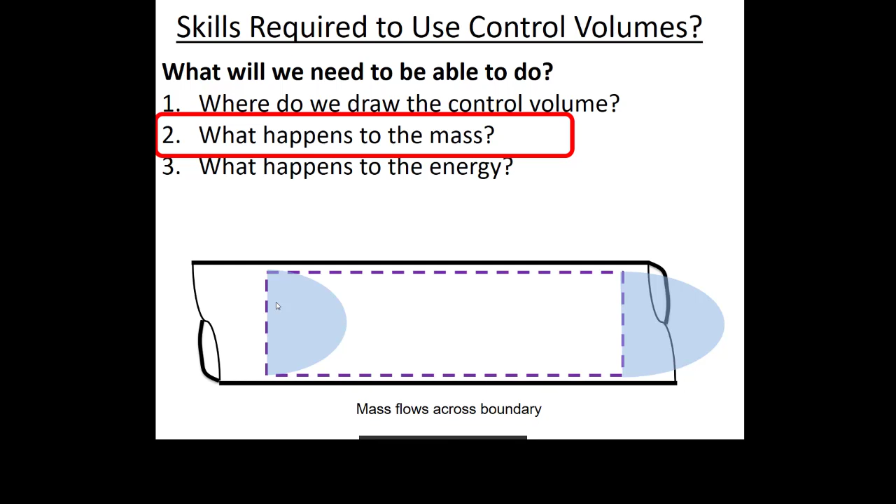And that's what we're going to start to look at here at the end of this lecture. And then only after we figure out what's going on with the mass, how it's coming in and going out, will we be able to answer what happens to the energy. Because we need to account for the mass coming in and out before we can get a full accounting of all the energy coming in and out of the system.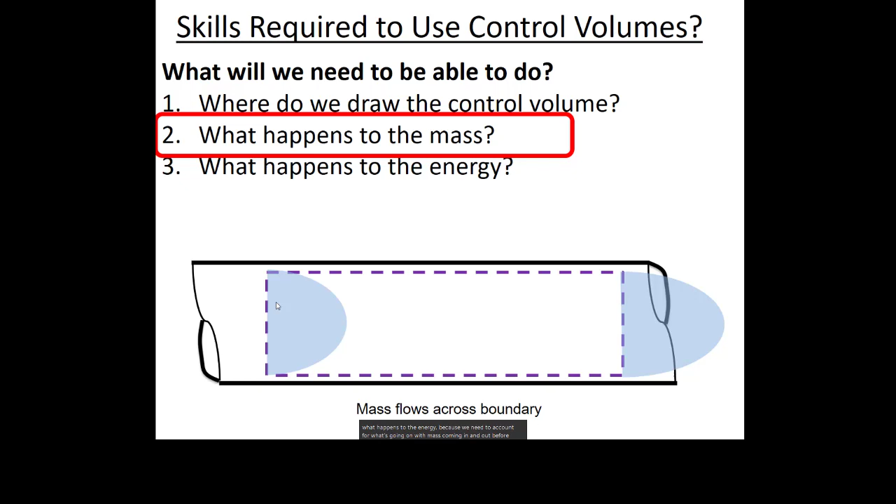So we're going to talk today about this idea of conservation of mass. Sometimes, because we just love these engineering decoder ring words, instead of calling it conservation of mass, sometimes we just call it continuity. I don't exactly know why. What this means is that the change of mass in the system over some time interval is equal to the net inflows of mass minus the net outflows.

And that's pretty straightforward if you think about a cup of water. There's some amount of water in my cup, but if I turned it over and poured half the water out, then I'd only have half the amount of water left. Or if I put it out in the rain and collected an extra 20 grams of water, then the mass in the cup would go up. So that's this idea of conservation of mass.

So there's the change in the mass in the system, which is like the change in energy that we've been talking about, over time in this case. And if I want to find that change in mass over time, I can add up all the mass that I put in and subtract all the mass that I take out. You didn't have to go to university to figure that out.

So that's what the net inflow of mass is. So here's a picture of maybe some ductwork or something. And if we think about conservation of mass, first we draw our control volume. What I do with the control volume is, if there's a solid wall in my system, I draw a boundary of my control volume there. And if there's a port where mass is coming in or out, I draw my control volume so that it's 90 degrees to the inlet or 90 degrees to the outlet.

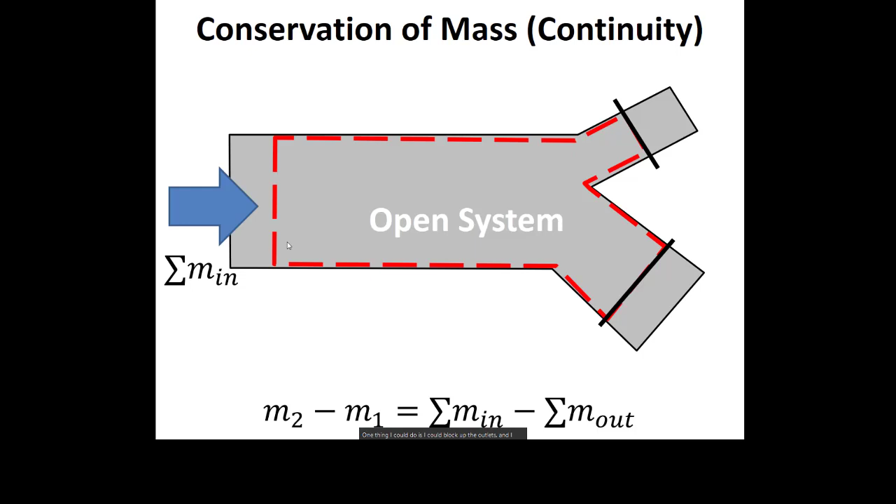So if I have some initial amount of mass in my system, and I want to find the final mass, then I can count the inflows and the outflows. One thing I could do is I could block up the outlets and I could add mass. And if that happened, then the mass at the outlet would go to zero. I'd only be adding mass. So that must mean the right-hand side of my equation would be positive, which means the left-hand side of my equation must be positive. So M2 must be bigger than M1.

And this is not to show you how math works. This is to try to build your confidence in the idea of this equation. So it kind of makes sense. But if I have some water in my cup, and I pour some out, now I have less water in my cup. So if there's no mass coming in, but there is mass going out, then that means the right-hand side of my equation is negative. So the left-hand side of my equation must also be negative, or M2 is less than M1.

So this is a diagram, it's kind of crude, of what conservation of mass looks like. At least in this elapsed time world that we've been using for closed systems. And maybe that's a hint of what's to come.

Now, there's this kind of special case that we talk about. Because right now, the amount of water in my cup is not changing. But that's just because nothing interesting is happening. There's no mass coming in, there's no mass going out. It's just not changing. But because it's not changing with time, we call that steady state. But that's the boring kind of steady state.

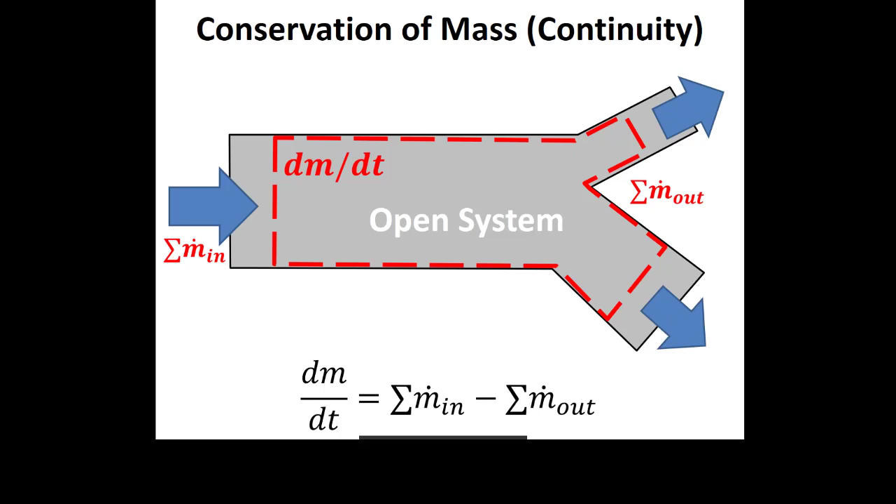We can draw the same system, but now instead of looking at it at two different times, we're taking one snapshot in time and looking at rates. So now we're not talking about M2 minus M1—we're talking about the rate of change of mass in the system. Am I storing or depleting mass, and if I am, how fast? And I'm talking about how fast mass is entering my system, how fast mass is leaving my system.

It gets rid of this derivative term because at steady state, everything is constant with respect to time. So at steady state, I'm not accumulating any mass in the system, because that would mean the mass in the system was changing. But I don't force the mass flow rate in or out to be zero. I just force them not to be changing. They have to be constant.

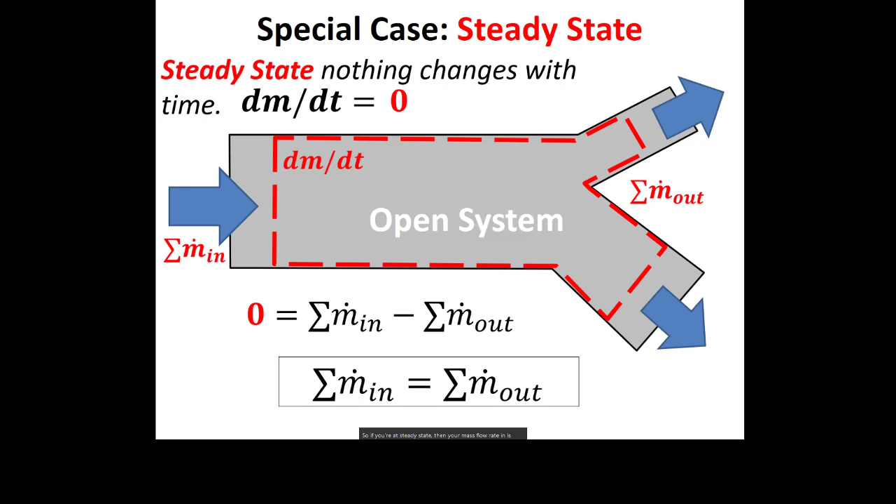Okay, so how do we solve a problem like this? Now, we've talked about this for thermofluids problems, problems that you'll do in fluid mechanics or heat transfer or thermodynamics. We know the right equations, but oftentimes we don't have enough information to actually solve the equations. So sometimes we have to use assumptions and our understanding of the physics to see which terms are important. So it's always nice to say, yeah, we got this equation, but there's three unknowns, and we don't necessarily know any of them. Although if we're at steady state, at least dm by dt goes to zero.

And then I need to know the mass flow rates coming in and the mass flow rates going out. But still, I want some kind of equation for mass flow rate, because I usually don't directly measure mass flow rate. So now we can think about flow through a pipe.

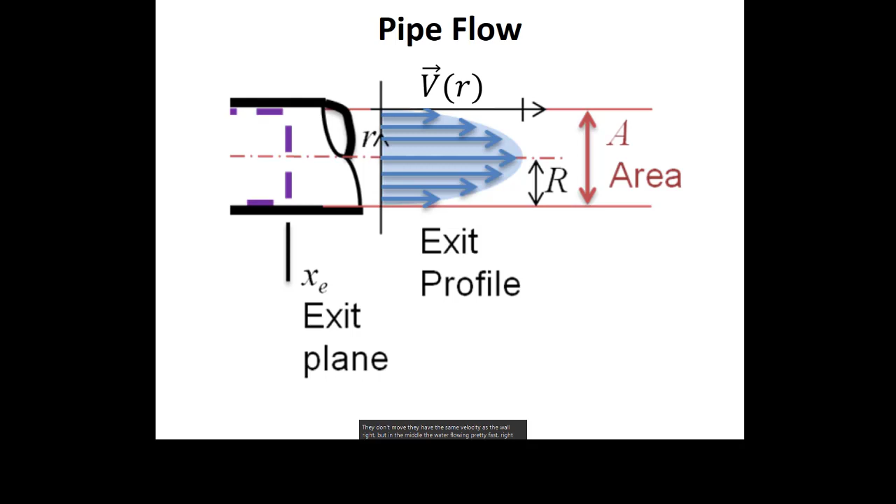Now, there's this rule that we call the no-slip boundary condition. And that means if you think of water flowing through a pipe, it's made up of lots of different fluid elements. You can think about little tiny volumes of fluid, infinitesimally small. And the ones that are right up against the wall, they don't move. They have the same velocity as the wall. But in the middle, the water's flowing pretty fast. So especially when the flow is slow, you get this beautiful parabolic shape here.

So how do we find the mass flow rate through that pipe? What we could do is integrate over the radius of the pipe the density of the fluid times the velocity, which is going to be a function of the radius, over the area. So if we did that, we'd get density times velocity times 2 pi r dr, if we're integrating over r, because velocity is a function of r.

Now, in order to build your confidence in this equation, I want to at least show you that the units are right. So my mass flow rate should be in kilograms per second. Density is kilograms per meter cubed. Velocity is meters per second. Area is meters squared. So I got meters cubed on the top, which goes away because I got meters cubed on the bottom. I get kilograms per second.

But over here, I got density, which is kilograms per meter cubed. Velocity is still meters per second. 2 pi is in radians, but radians kind of isn't a unit. And then I've got radius, so that's meters, times dr, which is like a really small length. So that also gets me to kilograms per second.

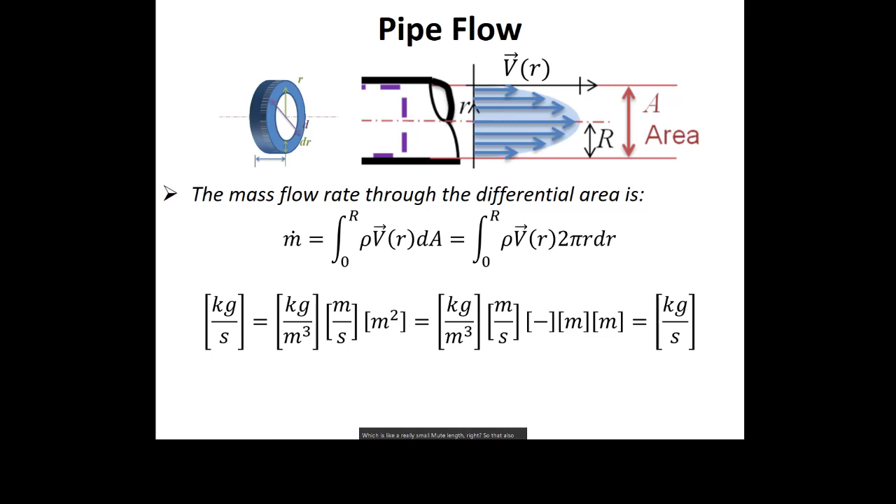So now I can think of this, right? And I don't really want to do the calculus, so I'm going to make some assumptions. I'm going to assume that the velocity is not actually a function of the radius, that if I can measure the average velocity in the pipe, that's good enough. And if that's true, then I could pull that velocity term out, maybe think of it as a speed instead of a velocity. If the density is constant, then I can pull that out too, and I get density times velocity or speed

times the integral over the area, right? Or density times velocity times 2 pi times the r dr from 0 to r. Or I get the density times the velocity times pi r squared, or the area. I can generalize this to velocity times the area times the density.

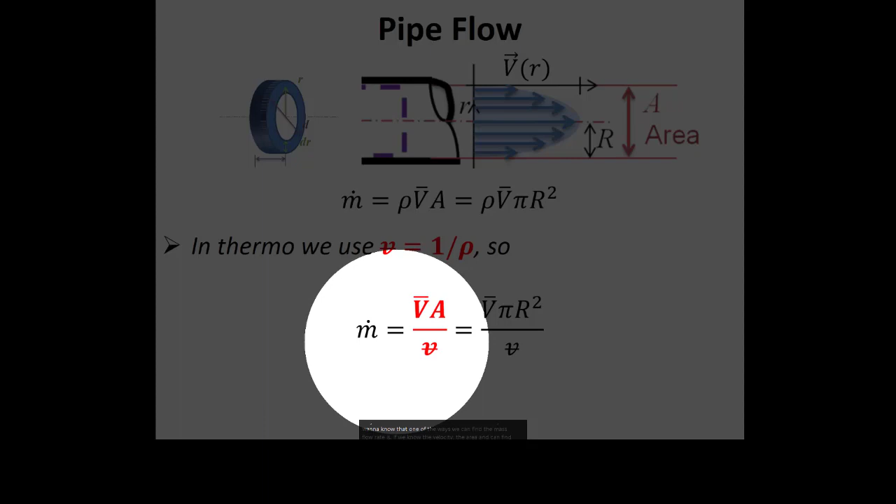That's usually how you talk about it in fluid mechanics. But in thermodynamics, we don't really talk about density, we talk about specific volume. So one of the ways that we will define mass flow rate is if at an inlet or an outlet we know the average velocity, we know the area, and we either know the specific volume, or maybe we know the temperature and the pressure so we can find the specific volume, then we can find the mass flow rate. So you won't ever have to do this derivation, but you want to know that one of the ways we can find the mass flow rate is if we know the velocity, the area, and can find the specific volume or fix the state, then we'll know the mass flow rate.

So you might be asking, well, I went through some, a minute or two saying actually velocity is parabolic like this, but we're assuming that it's constant. So is that a reasonable assumption or not? And it turns out that for most practical engineering applications, we have what we call turbulent flow. Have you ever heard of turbulent flow? Or maybe it's the opposite, laminar flow?

The way that I like to think about this, maybe when I was a kid I used to play with the taps in my parents' bathroom. So if I just open the tap a little bit, the flow is beautifully clear, but as I open up the valves all the way, it starts to almost look bubbly. And that's because when it's going slowly, you get this parabolic curve. We call that laminar flow.

But what happens is we talked about this fluid right up against the wall. It's stuck there, it doesn't get to move, right? It has this no-slip boundary condition. But the flow in the middle is always going faster and faster.

When I was a kid, growing up in Canada, we played this game sometimes called Crack the Whip. I don't know if you've ever heard about this. They probably don't let kids play this game anymore. It was especially good if you were on ice skating - by especially good, I mean especially dangerous. You'd have all your friends and you'd hold hands, and one person's in the middle and everybody else is going around. So one person's like the hub of the wheel and everybody else is like the spoke of the wheel.

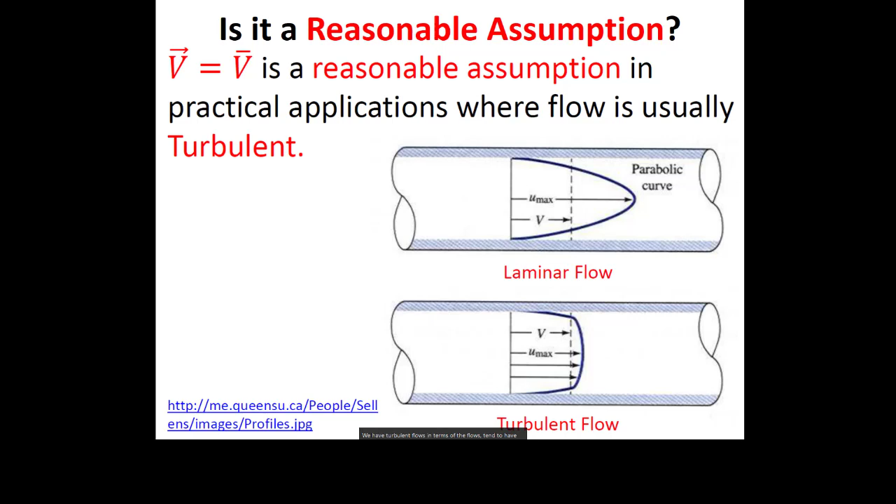The moral of the story is for most engineering applications, we have turbulent flows, and turbulent flows tend to have pretty average velocity profiles, where the velocity profile in the pipe is pretty consistent. It might change near the wall, but you have a sort of slug in the center where it's pretty constant, so it's not a terrible assumption.

And again, if we have steady state, that just means the sum of the area times velocity divided by specific volume at all the inlets equals the sum of the area times velocity over specific volume at all the outlets.

So that's all I wanted to talk about today. Next class, we'll do an example for conservation of mass and at least introduce the idea of conservation of energy. We may or may not get to an example, because I want to leave about half of the class time for questions about the exam.